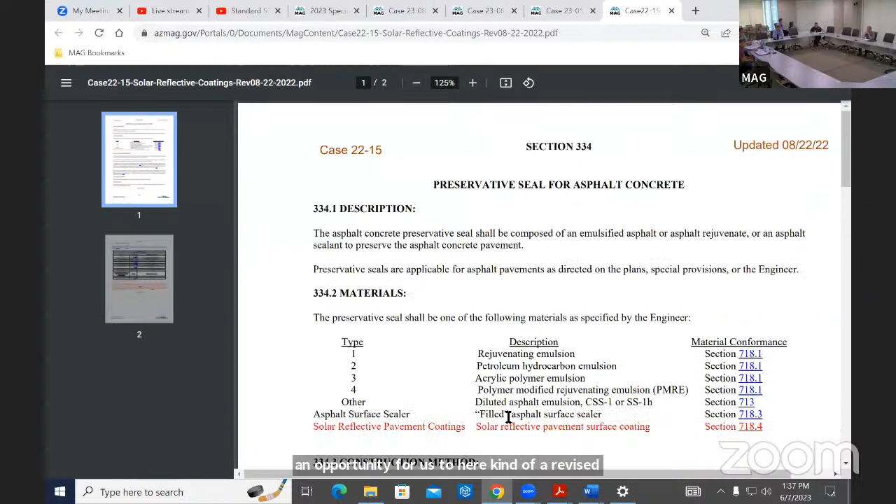And Kelly is the sponsor of this case. Last meeting, we had talked about an opportunity for us to hear a revised presentation. Kelly, if I'm not mistaken, I think in working out the details of that, you were working towards providing that in July. Is that accurate? Yeah, that's correct. My team wasn't able to make it today, so we would like to present in July. Okay, thank you, Kelly. I appreciate that.

This case item here, we do have an opportunity if there's further discussion, if anyone has additional questions or comments, if you want to discuss that at this time, we're welcome to do that. If you prefer to wait until July, until after the presentation, that may be a little bit more effective for us as far as discussing this case. But at this time, is there anyone that would like to discuss or has any questions on this case?

Okay, hearing none, we'll go ahead and move on to our next agenda item. And thank you, Kelly, for working with your staff to prepare that information. I know there's a lot of interest and people are looking forward to that.

So agenda item number 5, case 23-01, our miscellaneous corrections. This was recently updated, so we'll just go back through what these miscellaneous corrections are.

Item A is section 401.5, change Arizona Highway Department to Arizona Department of Transportation. Item B is section 102.10, delete 'or by telegram' from this section. Item C, remove reference to manhole steps in section 605.4, 610.8, and table 771-1. Item D is to correct a spelling error on detail 552 for bituminous. And item E is to replace section 107.4, archaeological reports title with reporting archaeological discoveries.

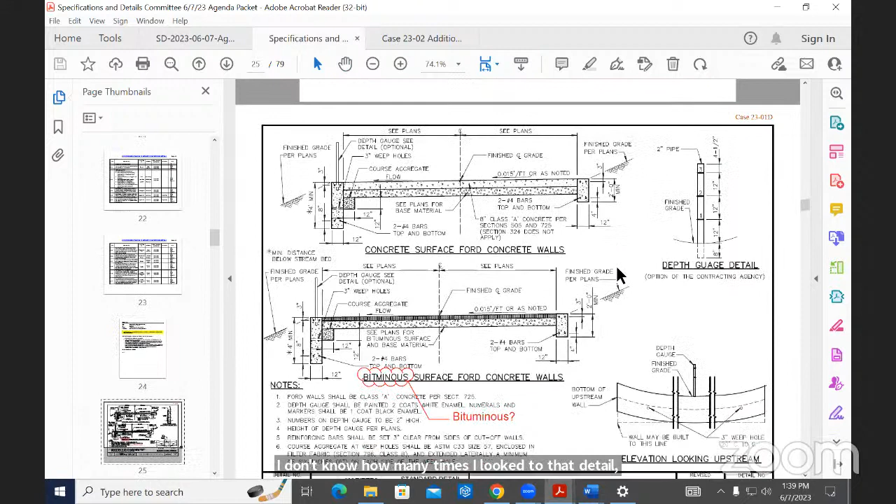And the second one, I know Sarah's on the line, she can probably add a little more to it, but the existing title kind of lends itself to believe that there's a report, but when you actually read the subsection, there's really no reference to a report that is there or a report that's going to be created. And so it was felt that 'reporting archaeological discoveries' was a more appropriate title. So I guess if anybody has any questions, we are open to suggestions.

So I don't know that I have a specific question about the proposed correction here, but Sarah, maybe you're the best prepared to answer it. But what does the section generally state is required?

The purpose of that particular spec is to set forth, explain the process for reporting a discovery during construction. So it's who to call, who to contact, and under the laws, the state laws that we have to follow.

So is it more of a notification then? Yes. Okay, I can see why archaeological reports is misleading for sure.

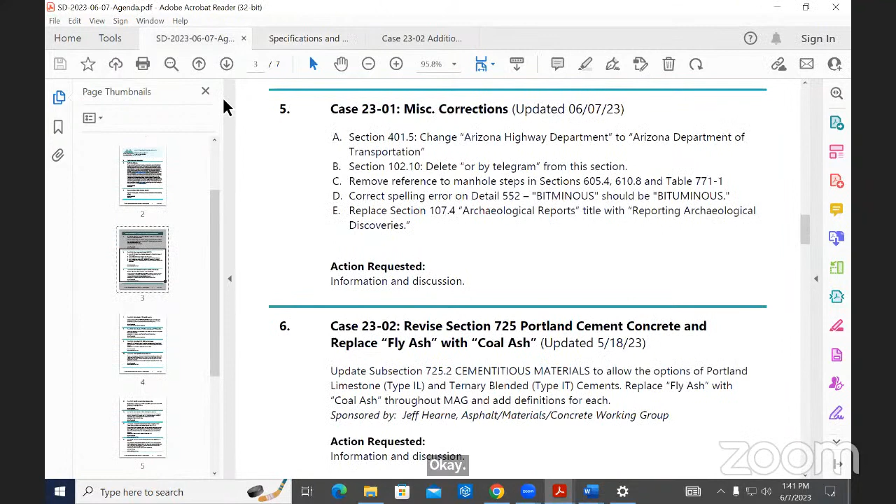Are there any questions or discussion on this agenda item? Is this miscellaneous correction everyone's okay with the wording as shown? Okay. Does anything else need to change in this section? As a title? No, just the title. Okay, that's good.

Okay, then it sounds like I should ask if everyone's supportive of the correction then. If there's no comments, I'm assuming everyone's supportive of it. Okay, we'll have that be part of our miscellaneous corrections case as we move forward through the year then. And certainly if anyone in future meetings has additional comments or discussion items on it, we can come back to it at the next meeting.

Moving on to agenda item number 6, case 23-02, revise section 725 Portland cement concrete and replace fly ash with coal ash. This is something we had briefly talked about in the last meeting, the second part of this, and the case has been updated with a number of changes to reflect that coal ash language. Jeff, you want to go ahead and walk us through the changes for this case?

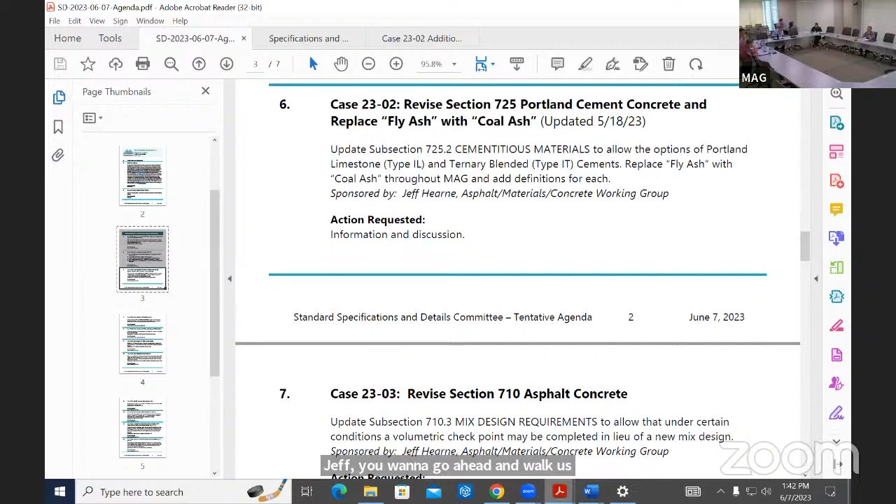Thank you, Mr. Chairman. Looking at the information provided in your packet, specifically the revision of section 725 dated 5/18/23, which would have been after our last working group meeting, we had discussed changing the word fly in fly ash to coal ash. And if you will note, that's been done in this revision.

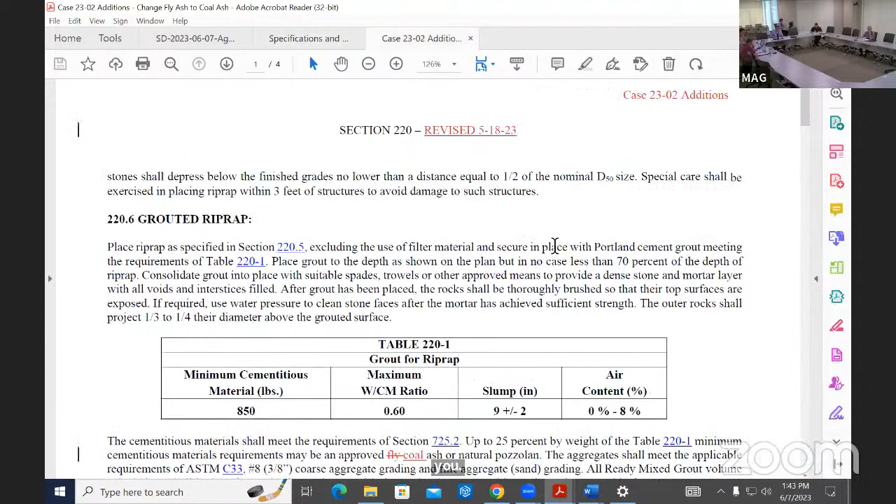I will point them out specifically to you. If you go to the new table 725-2, under item number B, it reads type 1P Portland cement blended or interground with coal ash now instead of fly ash or natural pozzolan. You'll notice right below that, item X, the targeted percentage of coal ash or natural pozzolan is changed there too.

Continuing on the notes, note C under type 1T, coal ash is changed there. Next line, PX, where P stands for coal ash, is changed there.

Moving down then to 725.2.1 under supplementary cementitious materials, we made a couple of clarification changes there, changing the word fly to coal and adding in parentheses such as fly ash or bottom ash so that people will continue to understand what those products are.

And then added another parentheses after natural pozzolan, again as a point of clarification, raw or calcined, because that's what -- well, we probably should have done that a long time ago, but that's the title of ASTM C618, how they're talked about in that particular specification.

That is the specification that's used for the approval of those products.

We also had discussion in our last meeting about potentially providing definitions for a couple of these items in section 101.2 under definitions and terms. That was also included in your packet, a couple of definitions, one definition for coal ash, one definition for fly ash, so that we could further explain what those materials are.

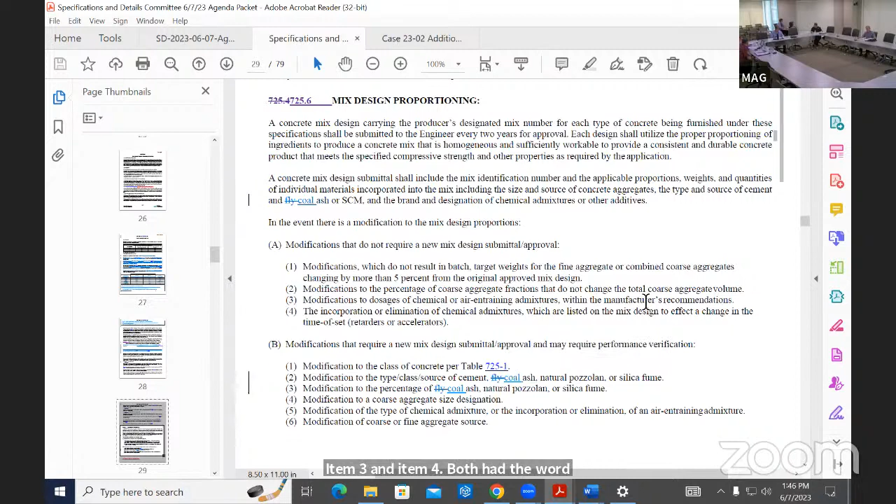Those would have been the changes that I would have proposed to make after our last revision that was dated 5/3. After doing a word search then in the rest of the document to see where fly ash is mentioned potentially in other specifications, there are several other sections where it's mentioned.

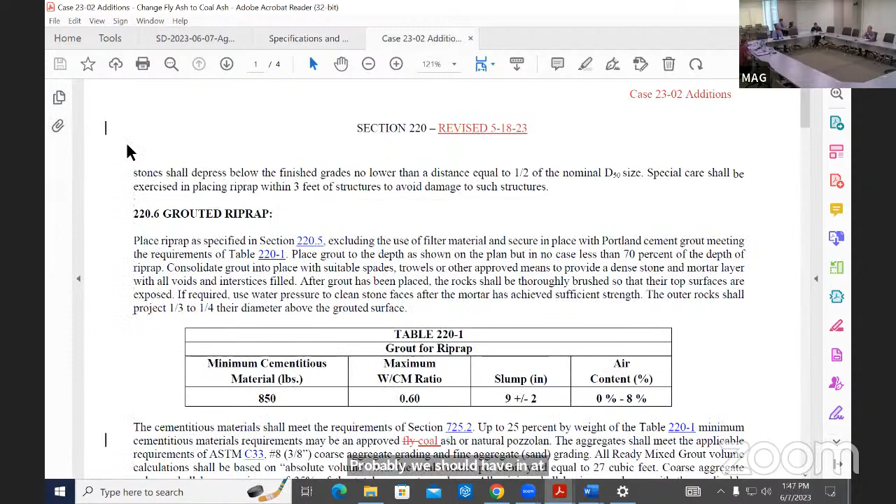Probably we should have at one point in time just referred those back to 725, but we didn't. Particularly in section 220, you look under table 220-1, second line, you have must be an approved fly ash or natural pozzolan. We would change the word fly to coal there.

In section 714 and 715 under mineral fillers, 714.2.1, 715.2.1, again, same scenario. Limestone dust or coal ash conforming to the requirements of AASHTO M242. And then on the CLSM standard 728, again, note 1 under table 728.1, the material is called out there too, the addition of coal ash or natural pozzolan in excess of the required Portland cement content may be used.

Actually, I'm surprised it was only those locations and it wasn't in more locations.

So Gordon and I had some conversation back and forth on how we should potentially do this, since the original case was about cement, adding cement, some new blended cement designations in there. And this really isn't that. But while we have 725 open, we should make those changes that have been done in ASTM.

We talked about maybe making this a new case for the change of this word through these various standards. We couldn't actually agree, so we just presented it to the committee this way as part of the existing case. But if we chose to, I could see that we could potentially make this a different case if we thought we wanted to do that and let them run through simultaneously.

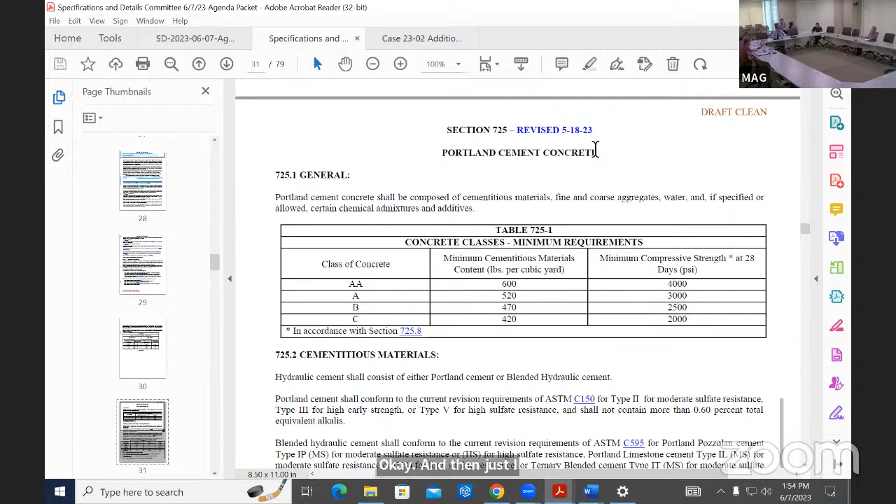Okay, and then just, I think last month we had talked about modifying that table, table 725-2. Isn't that a latest revision from last month, or am I just a month behind now in my mind? No, that's the latest revision from last month. I didn't make any additional revisions to that table since our last meeting.

I don't believe... okay, good. No, I shouldn't say that. Other than the notes where we changed the word fly to coal, the body of the table has not been changed.

Okay, I was just remembering that we had two different tables or something. We talked about combining into one, which is what I'm seeing. But I might be thinking back to comments from two months ago. You're a month behind, Mr. Chairman. Thank you very much. But it's good, I acknowledge that.

That's common. Well, it's been a little confusing for me too, going from working group meetings to this group and trying to keep track of it. So you're forgiven. Thank you.

Okay, are there any questions or comments on this case, or what will be a new case with the coal ash, fly ash change?

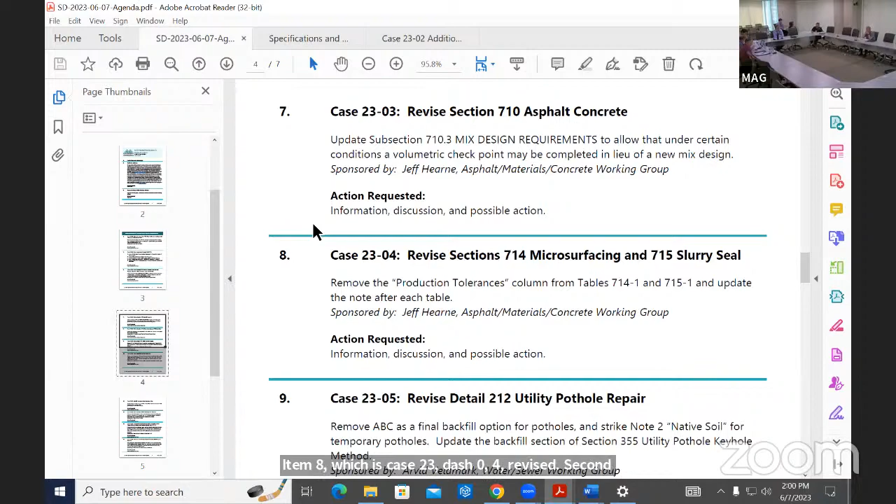We'll go ahead and move to agenda item 8, which is case 23-04, revised section 714 microsurfacing and 715 slurry seal. Similarly, this one is open for discussion and possible action. In the past meetings, we haven't had too many comments or much discussion on it recently.

Jeff, is this also out? You want to turn the time over to Alex to give us a brief overview of this case before we do the vote? Thank you, Mr. Chairman. I would. Alex? Appreciate it. Thank you both.

So this case here came about. We have had some challenges with this specific arrangement. This was something that came to be, I believe it was in 2019 that was added. We had conversation with the group, the pavement preservation group that added it. They thought it was well intentioned. However, it's caused issues being that these are non-blended materials.

Once targets are established, we found that multiple samples can be taken from the same stockpile material and used for a mix design, creating multiple targets that then in production, even though the same stockpile was used and may be compliant, you cannot produce for multiple contractors or projects simultaneously without potentially having failures. We did some investigation with the parties involved, and we have not seen any failures attributed to it. Everybody seems very comfortable with moving forward with the general design band as the allowable range for production.

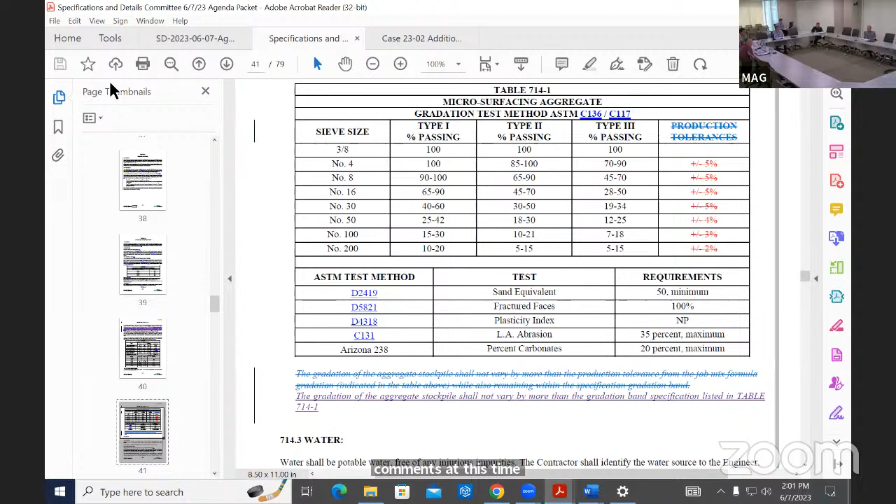Chairman, I'll motion for approval. Okay, we have a motion for approval. Is there a second? Glendale will second this one as well. Thank you. We'll go ahead and do a roll call vote.

Case 2304. Avondale, yes. Buckeye, okay, yes. Chandler, yes. El Mirage, yes. Gilbert, yes. Glendale, yes. Goodyear.

Goodyear, are you still there? Maricopa County, yes. Mesa, yes. Peoria, yes. Phoenix, yes. Scottsdale, yes. Surprise, yes. Going back to Goodyear. Still no answer. So that's 12 yes, 3 not present or voting.

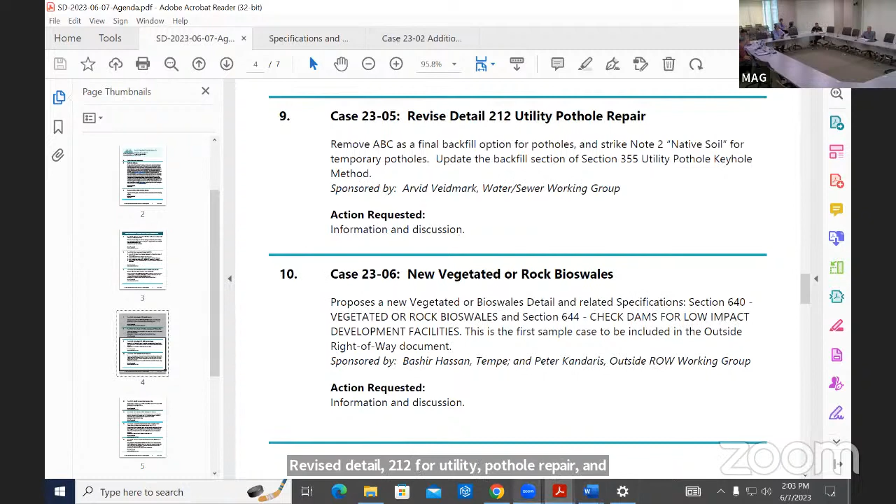Case 23-05, revised detail 212 for utility pothole repair. This case is sponsored by Arvid. If you would go ahead and take us through any updates or discussion on this.

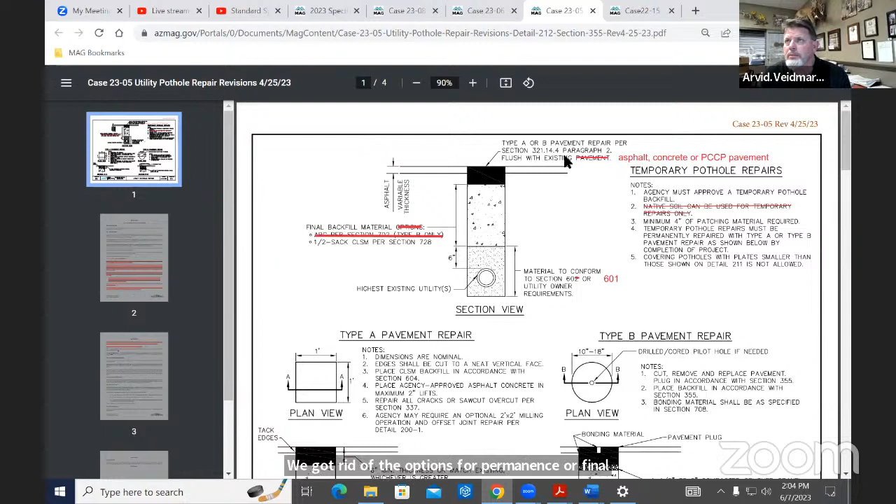Thank you, Mr. Chairman. The latest is on the screen there. There were no additional comments or questions this last month since the last meeting. Just to recap, we had a change to the detail in front of you—you can see where we had an error, we changed it to 601. We got rid of the options for permanent or final backfill, which would be the half-sack slurry, and left it that the agency must approve any temporary backfill if temporary is requested. And then down below, on 355, we went ahead and cleaned up the language in the actual spec to match the detail.

Okay, thank you, Arvid. Are there any questions, comments?

Okay, I would propose then, if there's no further discussion on this—I think we've had a lot of good discussion in past meetings—that we bring this to a vote for our next meeting. Any concerns with that? Okay, hearing none. Gordon, if we can have that on our agenda for possible action for next month. Yes, sir. Thank you.

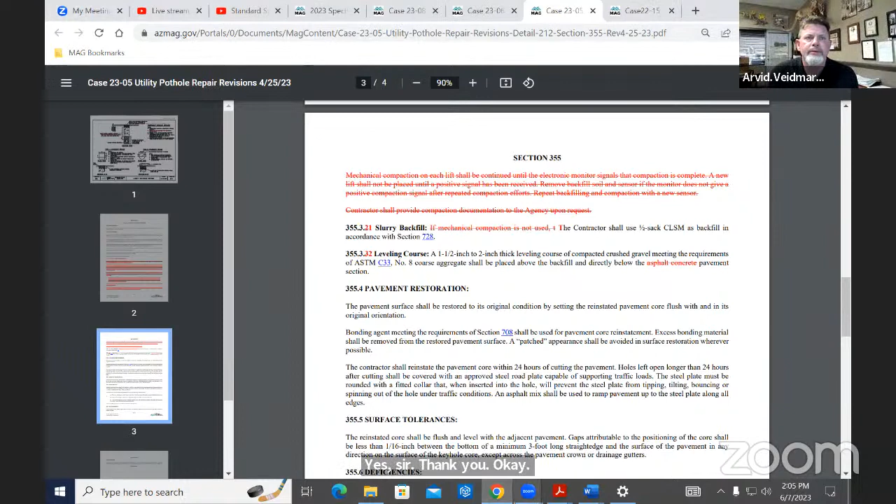My pleasure. Moving on to agenda item 10, case 23-06, new vegetated or rock bioswales.

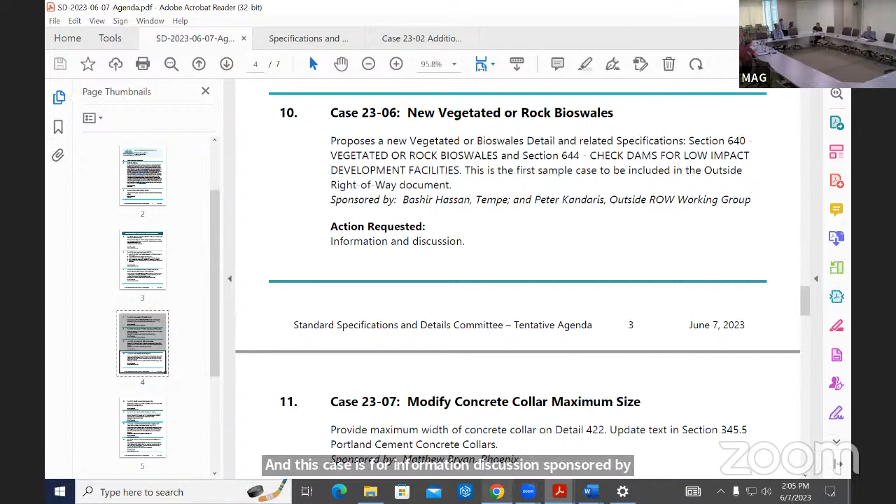This case is for information discussion, sponsored by Bashir and Peter. I don't think Bashir was here today. Peter, are you online and able to discuss this item for us? I don't think Peter is online either.

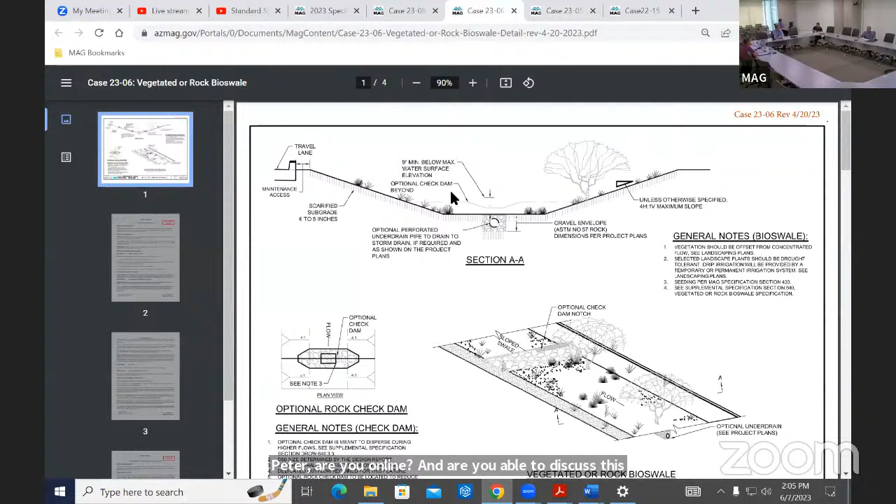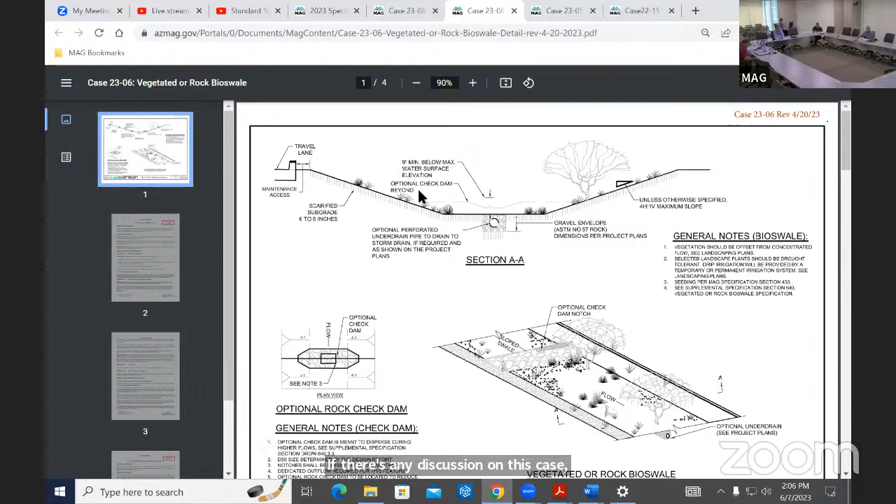Okay, well, this is one of our details that we had discussed, and I think is one of our likely candidates for the out-of-right-of-way document when we are at that point. If there's any discussion on this case, or if anyone has comments they want to bring up, and as a committee we can discuss at this time, we're welcome to do that. Any questions or comments, discussion items?

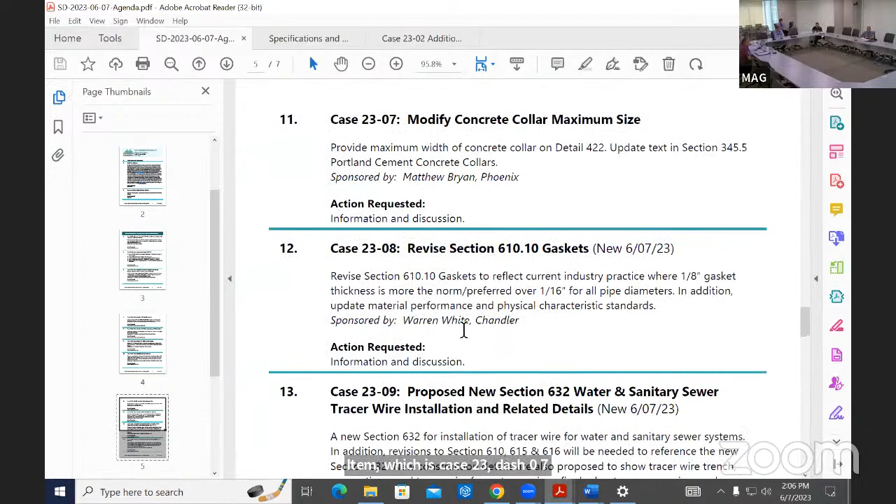Okay, then we'll go ahead and move on to our next agenda item, which is case 23-07, modify concrete collar maximum size. This one is sponsored by Matthew Bryan.

I think we had some discussion on the size of the collar and the necessity of that in one of our previous meetings. Matthew, have there been any changes to this case, or is there anything you want to bring to our attention, or just walk us back through what the concerns have been that are trying to be addressed through this case?

Good afternoon, Mr. Chairman. No, I don't have any changes to this as of now. I think in the water sewer working group, we were going to kind of let this one go. I don't know if we really have a case against it at this time.

Yeah, that's what I thought, Mr. Chairman. I think we're going to cancel this—I don't know what you call it, retract it.

Okay, that's fine. So as the case sponsors are suggesting we withdraw the case for consideration, is there anyone on the committee that would like to see the case go forward? Either we can have that discussion now, or it could be sponsored by others.

Okay, I'm not sure I've seen the withdrawal process on a case, but Gordon, do we need to leave it on, or do we just remove it from our agenda moving forward? Yes, if the sponsor wants to withdraw a case, then it'll just be noted as withdrawn on the case list, and then we won't hear anything more from it. It could be reintroduced at the beginning of next year, but not until then if it is withdrawn.

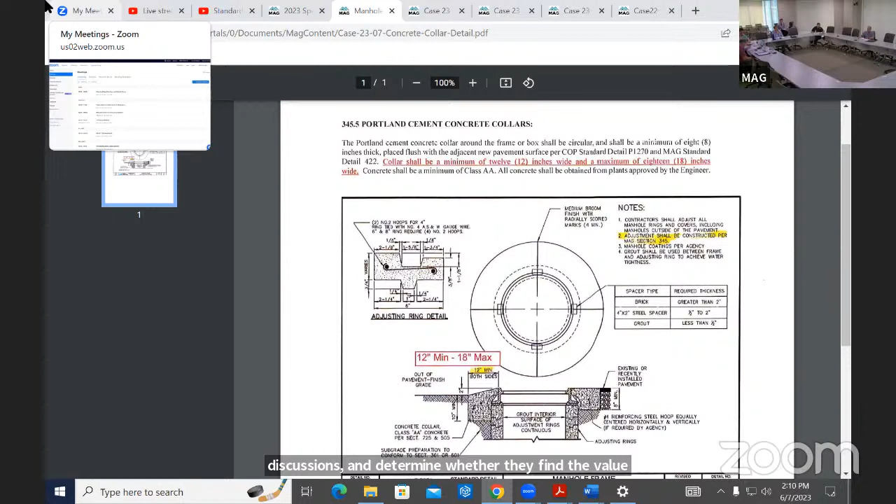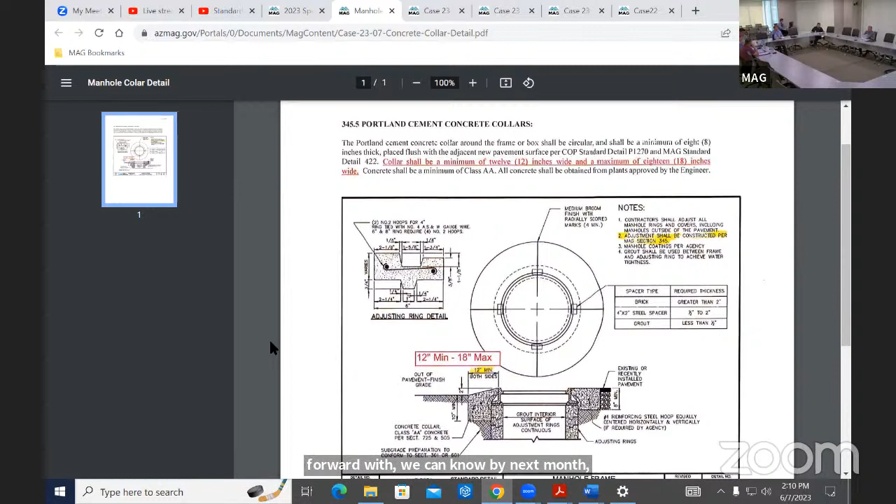Matthew, the request is to continue this case forward another month, and let municipalities have discussions and determine whether they find the value in this case as proposed, or a version of that. Are you willing to continue moving forward with it for another month? Yes, Mr. Chairman. Okay, so we'll go ahead and leave this on, understanding the thought process right now is that this may be withdrawn in the future. I'd highly encourage our committee members to go back within the next few weeks and have those discussions necessary, so that if it is a case the committee wants to move forward with, we can know by next month. Otherwise, we'll likely have this as a withdrawn case. So thank you, Matthew, for your efforts so far, and we'll go ahead and continue moving forward with it.

Mr. Chairman, can I interject a comment real quick on this particular matter? Yeah. When everybody takes this back for discussion, just keep in mind that we're dealing with finite resources here, and if we're gonna put a standard in place for strictly aesthetic reasons, let's consider the finite resource portion of that. That's all I wanted to mention.

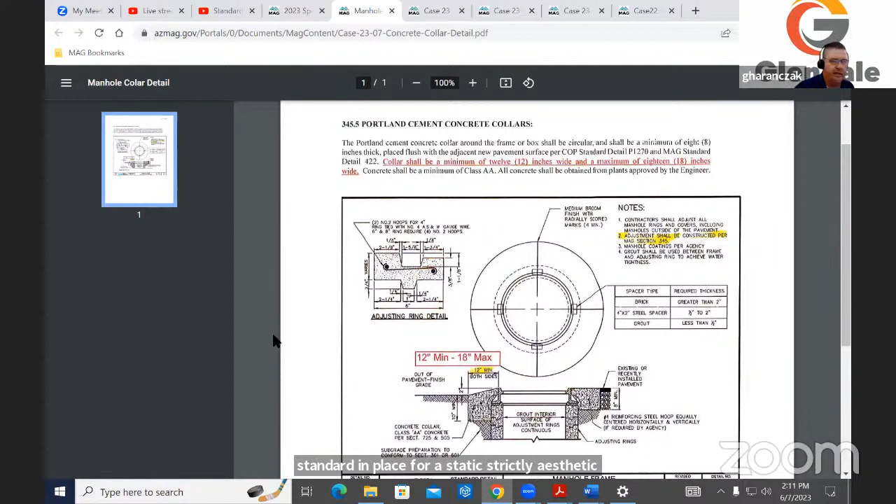Okay, we'll go ahead and move to agenda item number 12, case 23-08, revised section 610.10 on gaskets. This is a new case for this month, and so this is for information discussion. And we have Warren here. Warren, you want to introduce the case? Thank you, Mr. Chair. Good afternoon, everyone.

Yes, this is a new case. It was originally presented as just an update to the gasket thickness. It has been expanded a bit to also update some outdated performance and physical characteristic standards that are noted there. This is pertaining to section 610.10 in paragraph D. You can see in the case packet, it includes the strikeout and the recommended language there.

What I've changed is basically adding that the gasket material shall meet ANSI C111 and AWWA A21.11. If you research that, they kind of go hand in hand, and those are related to more or less the rubber gasket joints for DIP pressure pipe, so it's more of a pressure rating designation. That's one replacement, kind of bringing this up to what I see on material submittals and things like that.

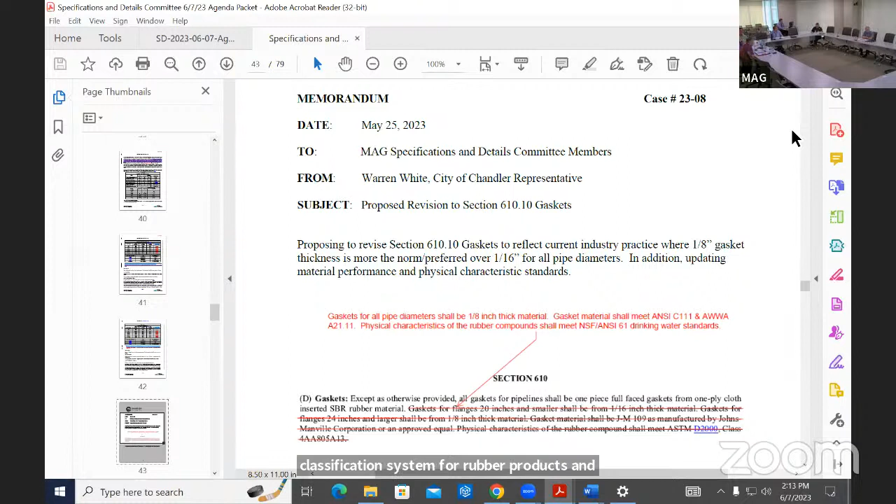Also, replacing the manufacturer listing, we have, as we've been trying to do in MAG, replacing the JM 109 or approved equal type of statement. And moving on from that to replace that ASTM D2000, which if you look at that, is a standard classification system for rubber products in automotive applications. I think that's maybe what was available at the time. Similar to material specs, I think putting the fact that it shall meet the NSF ANSI 61 drinking water standards would probably be more appropriate. I'm open to suggestions, but those are the two revisions.

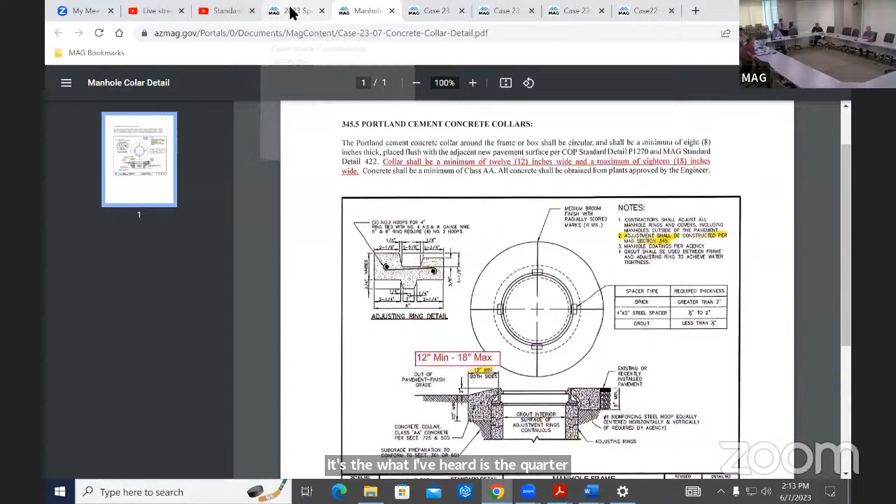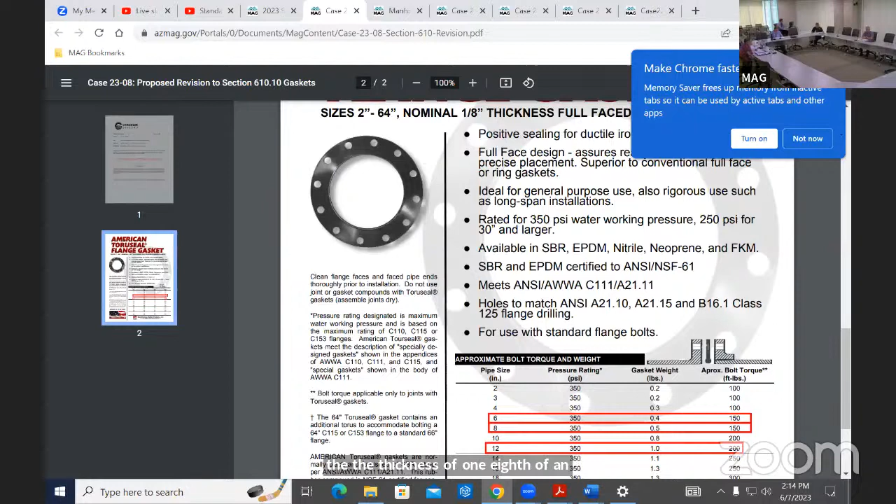And again, on the material thickness itself, what I've heard is the 1/4 inch, or excuse me, the 1/16 inch, was too thin, and most vendors have moved on to a thickness of 1/8 of an inch, which is more durable. So that's the case. Thank you, Warren.

So I'm not as familiar here, but with NSF or ANSI 61 drinking water standards, is there a section that specifically talks about the physical characteristics of rubber compounds? Basically it outlines the fact that anything in the public water system must meet the drinking water standards, including rubber, anything we put into that system. So it's more of a general standard. It doesn't go into specific properties of rubber, like for rubber gaskets necessarily. Correct. Okay. Yeah. Okay.

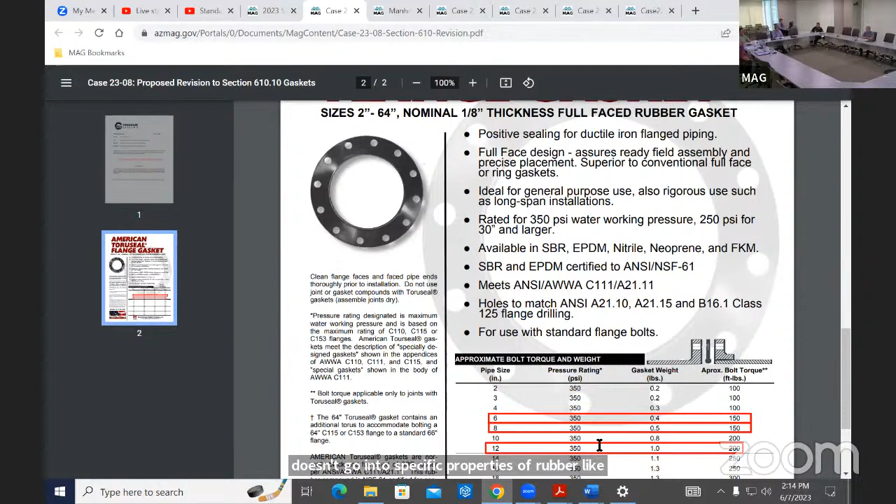And I'm assuming there's been discussion of this in the water sewer working group. What can you give me, what's the feedback been, or what's the discussion kind of been on that? Basically, limited discussion at this time at the water and sewer. We've just touched on the thickness. And then what was brought up at the last meeting, that we should probably look at the other performance and characteristic standards. So this is just basically kicking it off, open to suggestions or comments. Okay, let's open it up to the committee for any questions, comments, or discussion.

Mr. Chairman, I just wanted you to know that I wanted to take this to our Water Services Department and get their input before we make any final comments. Yeah, great, thank you, Dan. I appreciate that, and I'll be doing the same with City of Mesa. I'll be working with our water resources staff to review, and hopefully I can be prepared with some additional feedback in our upcoming meetings. Anyone else have questions or comments at this time?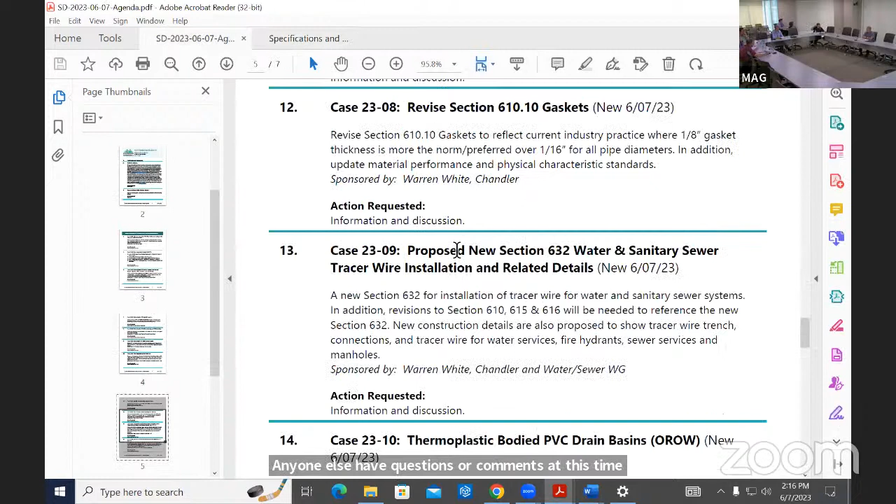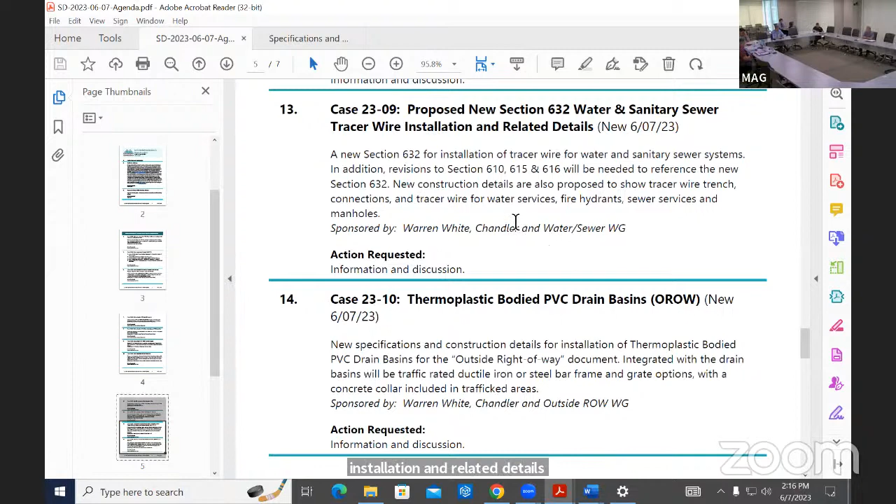Okay, hearing none, thank you very much. Appreciate it, Warren. We'll move on to our next agenda item here, which is case 23-09, proposed new section 632, water and sanitary sewer tracer wire installation and related details. This is also a new case that we'll have presented here today for the first time, also sponsored by Warren, with the support of the Water Sewer Working Group. If you want to take us through that one, Warren?

Thank you again. This has been touched on in the past couple of years. I think Water Sewer is finally pulling things together to submit this case after finding some decent material out there that I've noted at the bottom, that document you can hyperlink to. Currently in the specifications and details, we don't really talk about the locator wire, tracer wire, or the actual tape that goes above the pipe. So this case would introduce those.

And I'm not sure if this is required, if tracer wire is required in all agencies. So there is language, if we introduce this, in the installation specifications, that would be as required by agency. The tracer wire itself is an acceptable method to meet the requirements of ARS 40-360-22, which basically says all underground facilities must be locatable.

So this tracer wire is something, I think, in Chandler, I know we've had details and some trench details that specify its use, but we haven't really had anything that puts that system together, that makes it clear what you're actually installing and terminating. So the package itself is logical, I think, in terms of what I've found after researching. There are definitely some areas that I think need more vetting and discussion. I think we need to work through the working group.

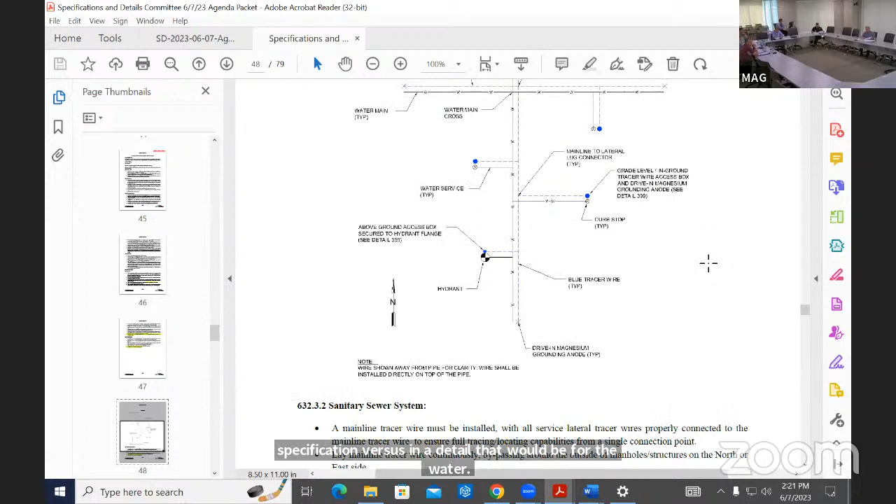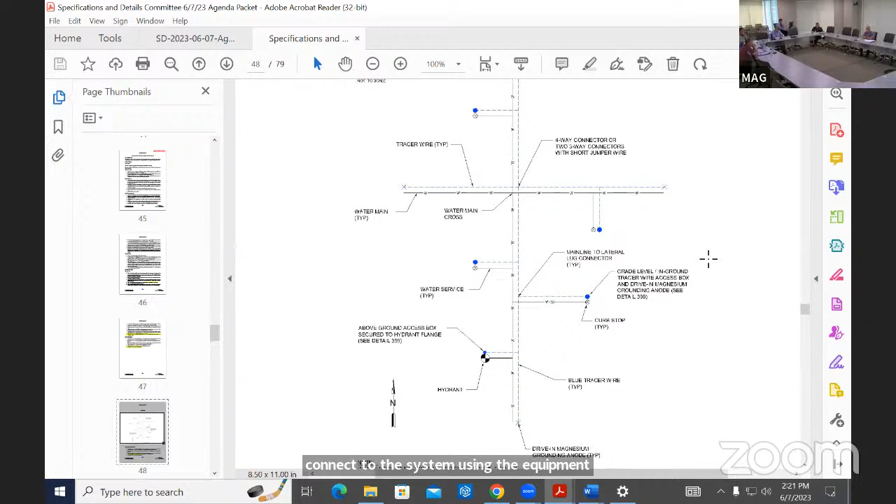You can see it's a continuous network where you have connections at the crosses. Basically, it terminates at the water services, maybe curb stops at the hydrants, so you could actually get out of the right of way and connect to the system using the equipment, and everything's hot, and you can locate your lines that way. Actually doing it at every water service, I've had some thoughts on that. I may be a little overkill, but we'll have to talk about that, something we can discuss.

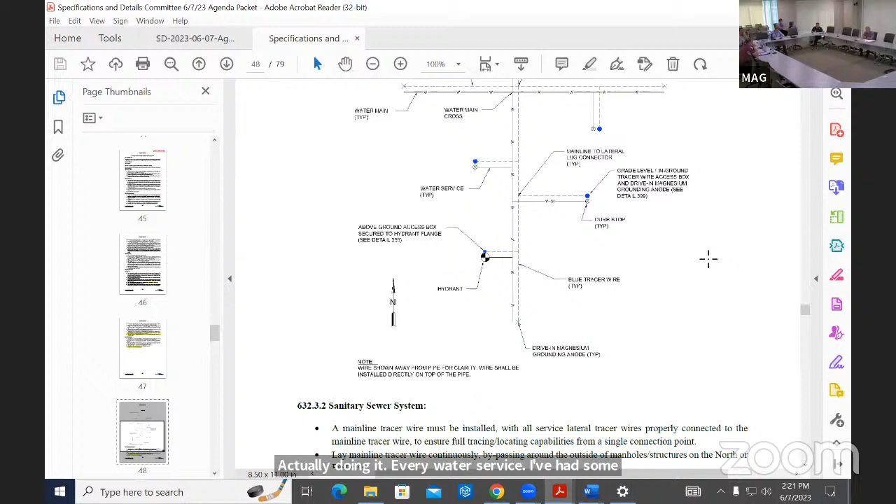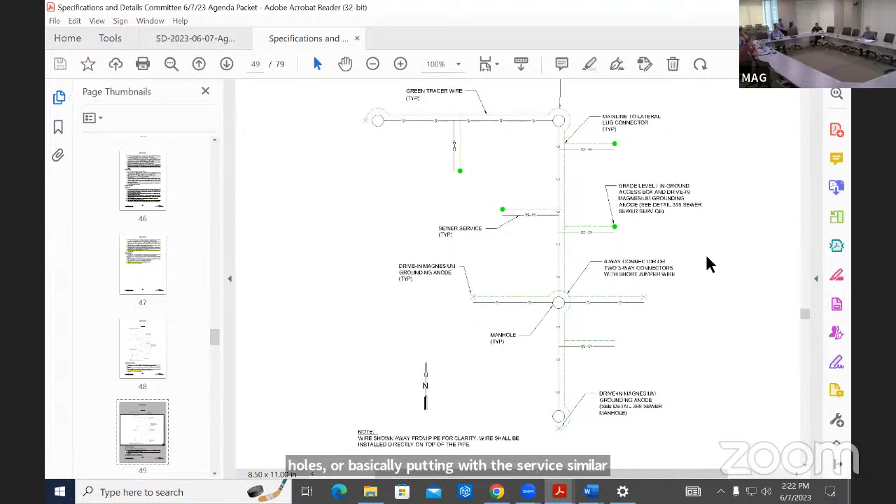And likewise for sanitary, similar thing. I know in Chandler, our current standards have had those locator wires coming up the manholes, which has always been a little unusual in my mind, because every time you do the mill and overlay and adjustment, you have those wires and you're going to pull out the adjustment rings, and the contractor's probably not putting them back in the way they were. So this proposal would not bring them up at the manholes. You're basically putting them at the service, similar to every service. And again, that might be overkill, but we can talk about that. So it's a complete system to be able to locate your underground facilities using the wire. I've heard it's a cheaper method to do things.

Then moving on to the details themselves. This is simply the trench detail showing the identification tape. And again, if you look in our specifications, we don't really have a requirement for that. But I believe most agencies probably have some type of tape above their pipes. So okay, you're excavating, oh yeah, it's a blue tape, I'm about to hit water, or green tape for sewer, or purple. So that kind of thing.

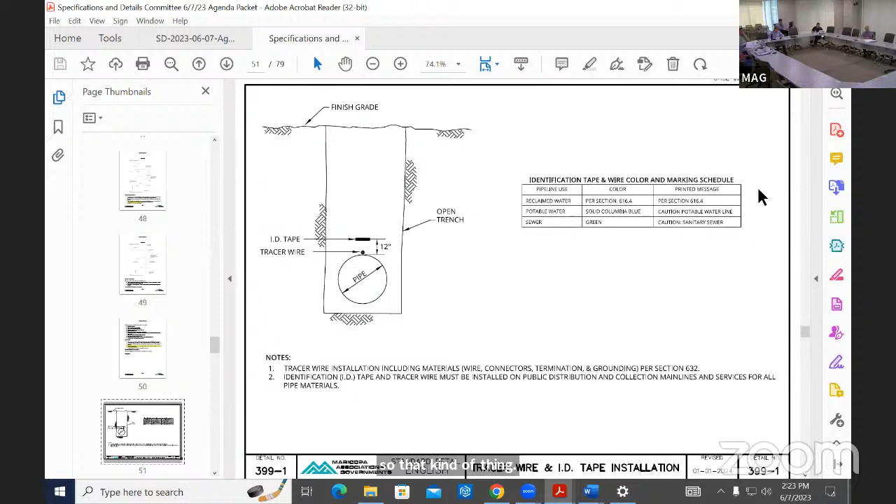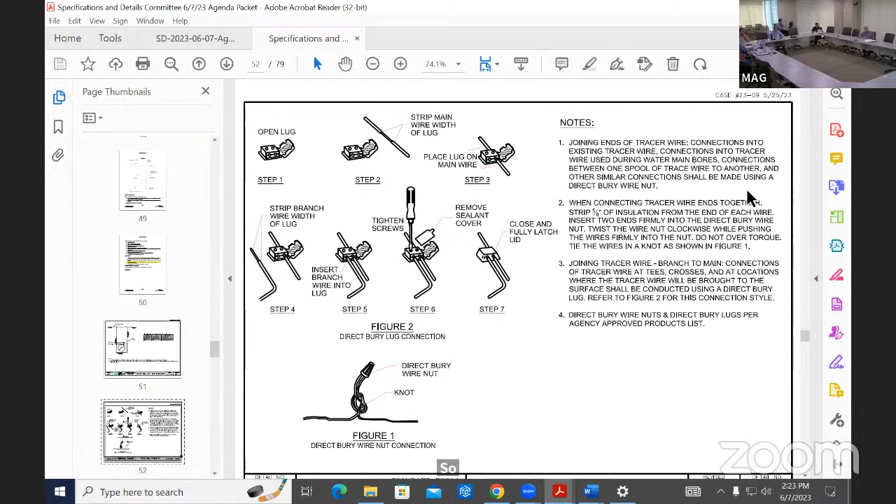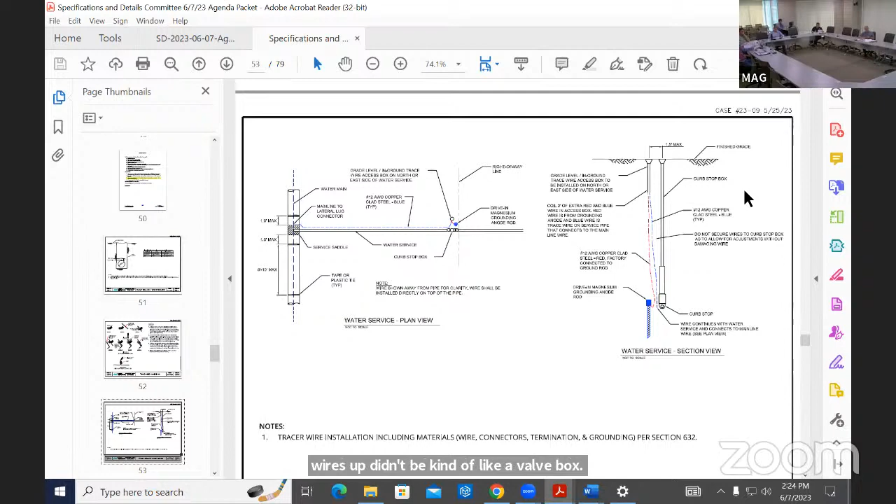Moving on, into the actual details of how you take the wires up the services, how you're doing the grounding, bringing the wires up. It would be kind of like a valve box, I guess, where the wires would pop the lid and connect to the wires that are coming out there.

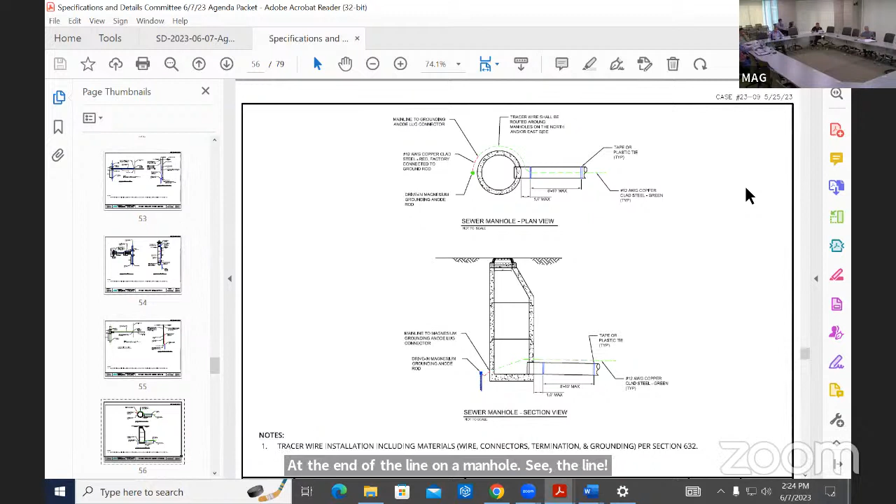So it's all very similar at the hydrants. You're connecting to the hydrant. And then it's sewer services similarly. And then this last one shows how it would be at the end of a line on a manhole. See, the line doesn't come up the manhole. It just terminates there at the base of the manhole.

And then last, these are the installation specs. Again, I've tried to be consistent, putting it in the general, talking about the identification tape shall be installed per detail 399. I believe all agencies require that, but if that's something to discuss, we can. And then the tracer wire itself, for that new section 632 and detail 399, as required by agency. If that's necessary, we can leave that.

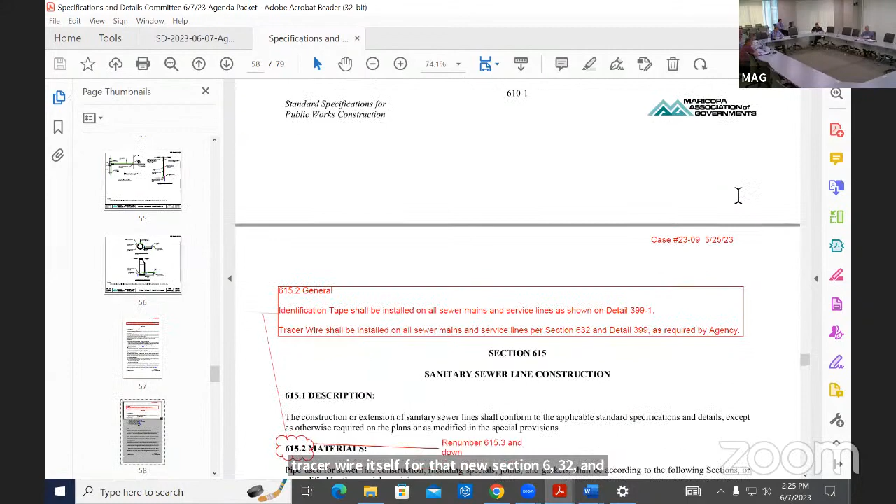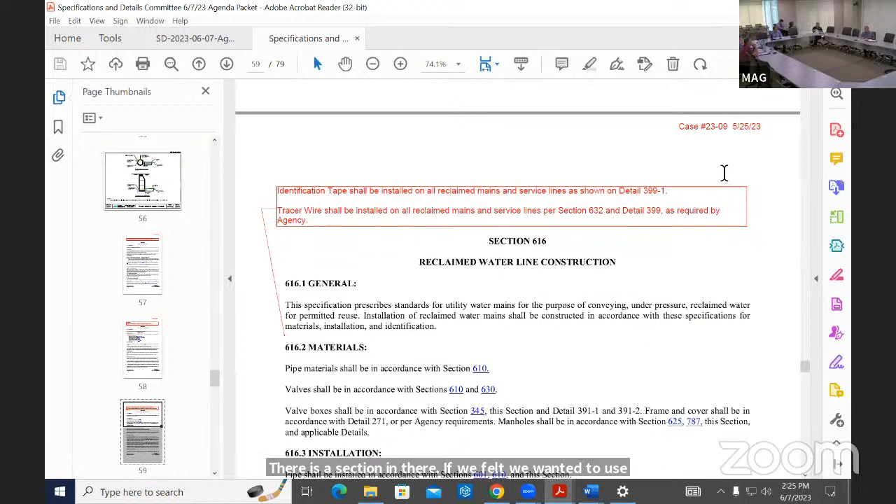So that applies to the water line construction, sewer, and reclaimed water. What I didn't note when we were looking at the specification itself, there is a section in there. If we felt we wanted to use this for locating storm, we could do that as well. Storm would be similar to sanitary sewer. So a little flexibility there.

So that's a lot, I guess, to introduce there, but we can kick it off from there. Yeah, thank you, Warren. That is a lot of information, a lot of work obviously gone into this so far.

I guess my first question is, and maybe I just missed this, but did you talk about how in the MAG specifications already, there's references to tracer wire, but there's no specification on tracer wire? Is that correct? There are a couple references to tracer wire on, I believe, the boring detail, but there's nothing in the actual installation specifications at all, for any of the utility, water, sewer, any of the other utilities. There's in MAG, there's not a specification requiring or indicating tracer wire. Not at this time.

Okay. And is Chandler using that, or municipalities in general, as far as what you know, using tracer wire on all the underground utilities, or just PVC utilities? All water, sewer, reclaimed, ductile iron, PVC, clay pipe, anything? Correct. I've heard that even DI is not locatable underground because of the wrapping and things like that.

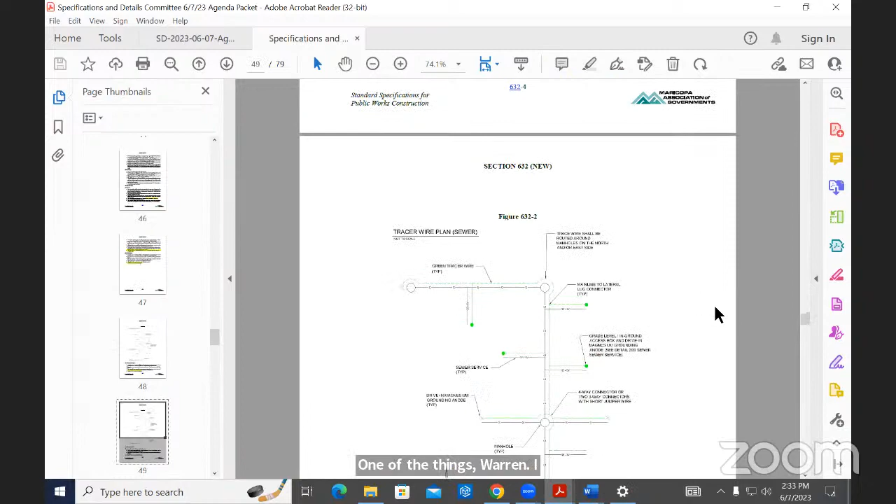Thanks, Jim. Okay, we'll do, and just as an option. I mean, hopefully most agencies can do it themselves, but there are third parties out there that do it. A lot of the companies that do cathodic protection can do it. So that's all I had for now, and we'll do a lot more of it in the working group as well.

But yeah, it's really detailed. So thank you, Warren. No problem.

And lastly, I forgot to mention that last measurement and payment. Instead of this being a new pay item, it would still be considered part of and included in the water line and sewer line construction. So we don't want that as another pay item, would we?

So in the discussion so far, has there been discussion of the potential cost impact, or is this a requirement anyway, so it doesn't really reflect a new cost on a project? That's my understanding, because they're already laying those wires out, the copper, the additional terminations, things like that. Again, I haven't seen and witnessed how it's being done.

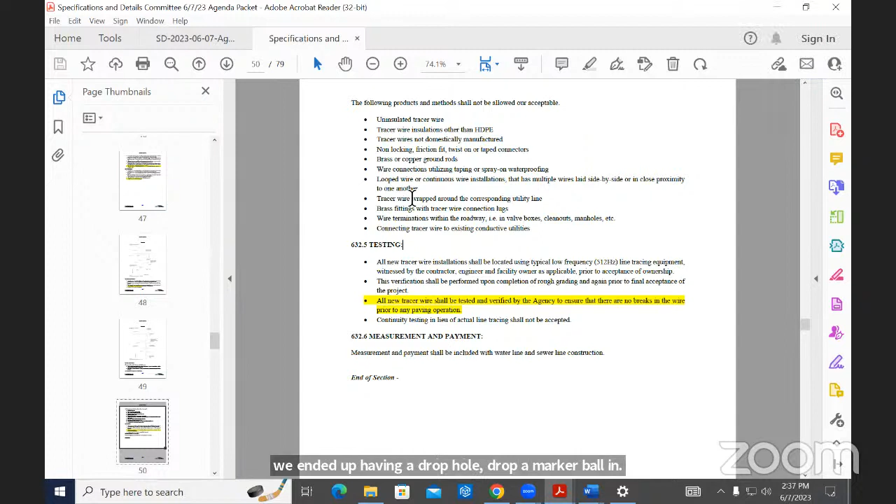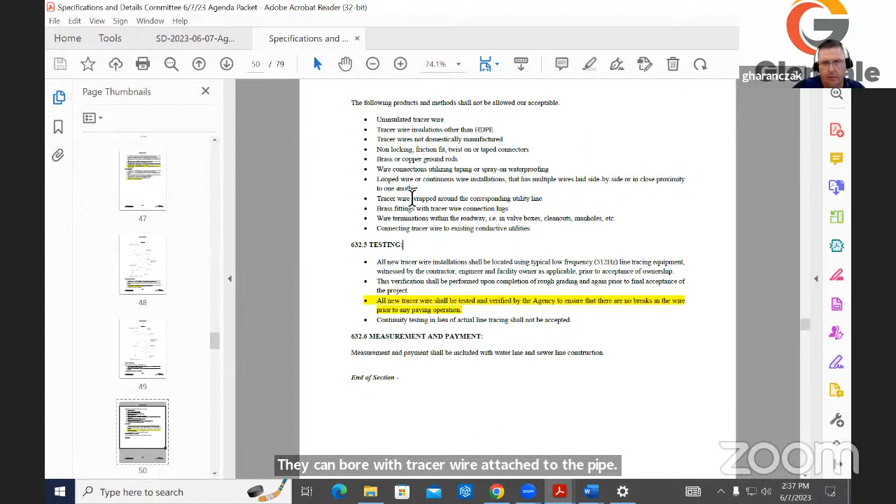Yeah, I don't know, Arvid could comment on that. He does a lot of this, and I asked them, you know, can they bore with tracer wire attached to the pipe? Yeah, we were able to do that, but we did lose it in one spot in particular. We lost about a 400-foot run, maybe a little less than that, of tracer wire where it didn't go through.

And that's the risk you take in HDD, of course, you don't know to what extent. Did they tape it to the product line? Did they tape it every foot, or every 10 feet, or every 5 feet? Ultimately, we ended up just dropping in 3M marker balls, but I didn't know what else to do on that particular application. If they cut the PCCP, I might get an earful.

Oh no, you're right on that regard. So one of the discussions we had in the working group was when it comes to trenchless applications, we have a tendency of using a lot of duct tape to ensure we're doing everything in our ability. We'll tape it every foot on the HDPE or whatever the product is, because you've also got the risk of it getting torn, but you've got the rotation too. Oftentimes the HDPE will rifle as it gets pulled back, and now you're getting that tracer line almost corkscrewing through the ground. That is the risk with testing.

The other thing I've seen agencies do across the country is pull in a PVC conduit that's taped to the product line, and then put the tracer wire down through that. So that's another alternative to hopefully avoid damaging the tracer wire. But there's also the risk that you're going to damage that small PVC pipe. So trenchless opens up its biggest challenges.

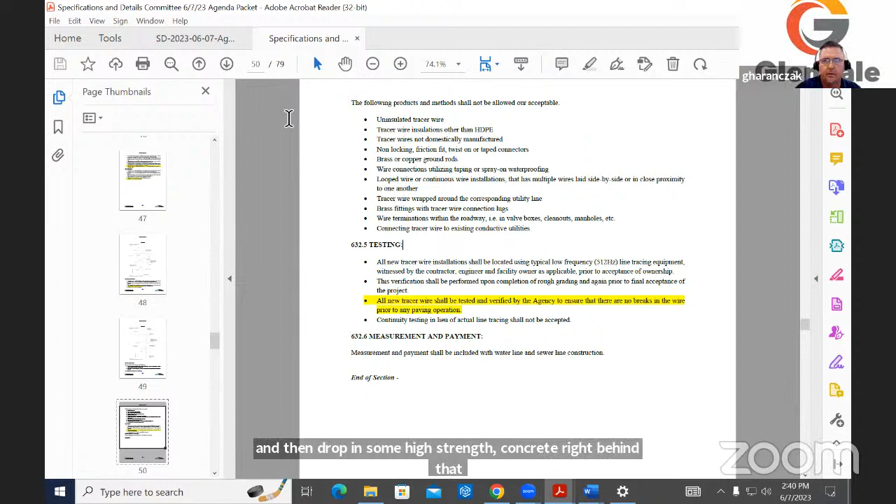To your point, real quick, of what happened in that scenario - we've done it before where you'll go in, core a hole in the concrete, pothole down, find the top of that line, and then, like you said, that's probably what you did - drop in a tracer ball at that location. Yeah, it was either excavate a 12 by 12 panel and deal with the load transfer doweling and all that, or core it. Yep, and then drop in some high strength concrete right behind it. Yeah, that was a good call. That was a good way to still give your ability to find stuff and not do a lot of damage to the existing grade. So we've got options.

Well, thank you for the conversation.

Absolutely. So Arvid, on that note, same thought process - would it be something that may be an idea to double up on a tracer wire when you're doing an HDD? So if you lose one, you've got the other. Is that something that could be a possibility, or if you're going to lose one, are you going to lose both? No, that's a great point.

On larger projects, if you're pulling a non-conductive product through the ground, other than, let's just say, steel, then yeah, you could put 2 or 3 strategically placed on the pipe. Maybe put one at 6 and one at 12, one at 3, one at 9, and tape them. You're going to be taping it up anyway, and wire is cheap, so you might as well put on as much as you feel comfortable with.

And that comes down to the ground conditions, the length of the bore, how big is the overcut, is the driller pumping the mud at the proper viscosity to allow for a slick pull through. If they're doing all those things and everything falls in their favor, odds are those lines will make it. Historically, when we see the tracer wire break on the product pullback is when they get into cobbles, rocks, or gravel, or they're not pumping their mud runny enough - that's the best way to put it - to help a nice slick pull through. If they let that mud bundle up, then all those cuttings start to bundle up, and that's when we see that tracer wire get torn off.

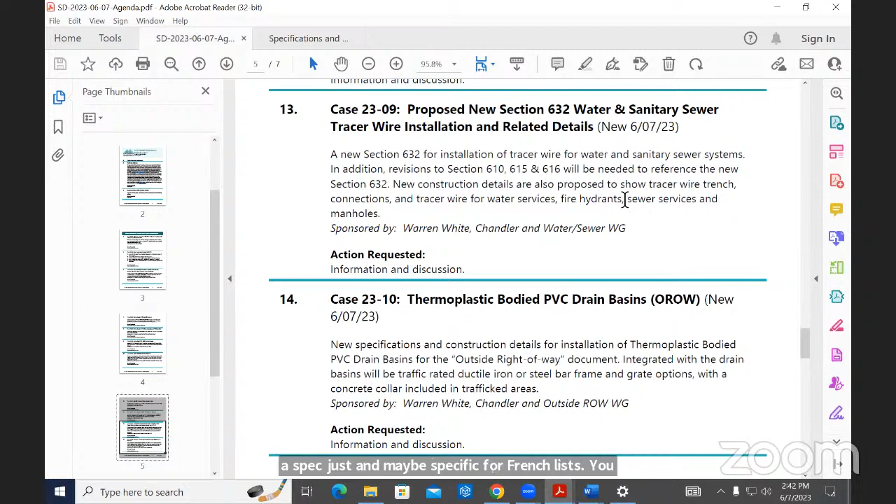Okay, thank you, Warren, for the introduction of this case. There's a lot of information there, obviously. I'm certain municipalities will want to take some time to go back and review that, and I'm sure we'll have many months of good dialogue coming up on this case and all the little aspects of it. So thank you for your time so far, and we look forward to continuing this discussion moving forward.

Mr. Chair, one last question. Did you want to pursue a presentation in this group or the working group, or wait another month? I know we were talking possibly—what's your thought on the presentation? Yeah, I think I'd be okay with the presentation. There's a lot of information here, so I think that would be helpful.

Let's talk about timing afterward. I think it's definitely something I would want to invite some of my city staff to at least watch online, so I think moving that direction would probably be good. Just timing wise, whenever makes sense, I'm not quite sure. I think allowing some time for people to digest what's already here will probably be beneficial, to let them start generating some questions. Okay, makes sense. Thank you.

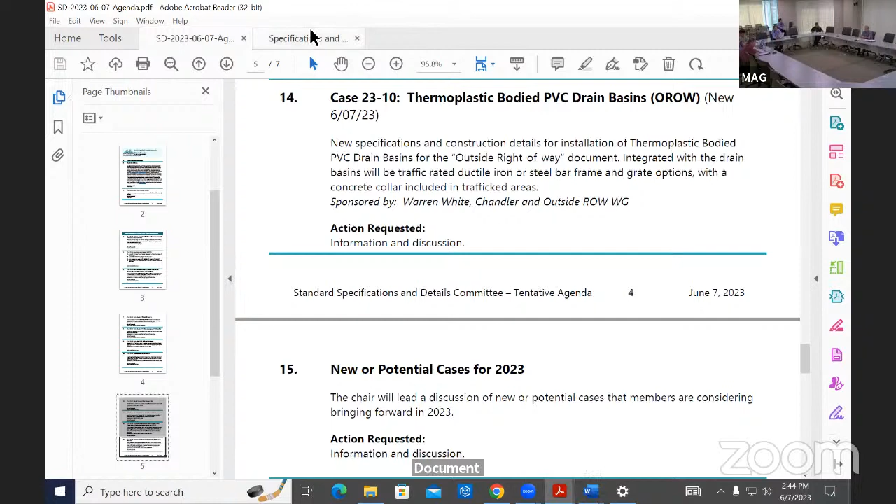Okay, thank you. We'll move on to our next agenda item, case 23-10, thermoplastic bodied PVC drain basins for the outside right-of-way document. Warren, looks like you're the winner again. I will briefly kick this off, and then I'm going to turn this over to Nick. Thank you, Nick. I know this has been discussed in the outside right-of-way working group since I believe last August, and I'm familiar with the product. I think most of us have probably seen this on site in many instances.

These types of structures for storm systems—it's well used in the valley and elsewhere, I know. That's another large case with lots of effort here, but Nick is definitely the one that can give us the update and talk this through.

Thank you, Warren. So we've sat on the outside the right-of-way subcommittee for almost a year now, presenting this case, and this is the first time we've pushed it to the main committee. We've made a little bit of progress from where we first started with this. We understand we are applying for an outside the right-of-way application, and this is our PVC thermoplastic body drain basins. It'll be integrated with a ductile iron or steel bar frame and grate.

In the detail packet I included, there's both of those, with a concrete collar included for trafficked areas or where otherwise deemed necessary. New construction details are also included if you want to scroll down a little bit, Gordon, as well as the spec.

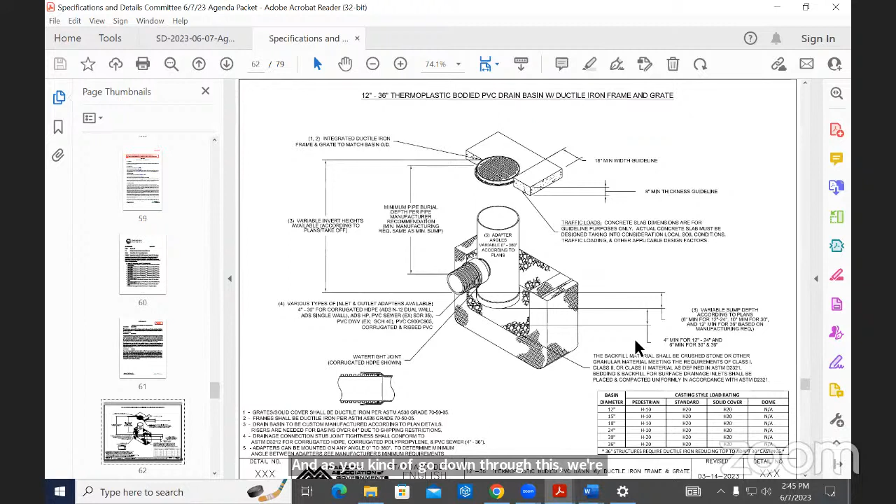As you go down through this, we're applying for 12-inch through 36-inch thermoplastic bodied PVC drain basins. This right here would be with our ductile iron frame and grate option. If you keep scrolling through this detail packet, there's individual details for what these castings look like from 12 inches to 30 inches.

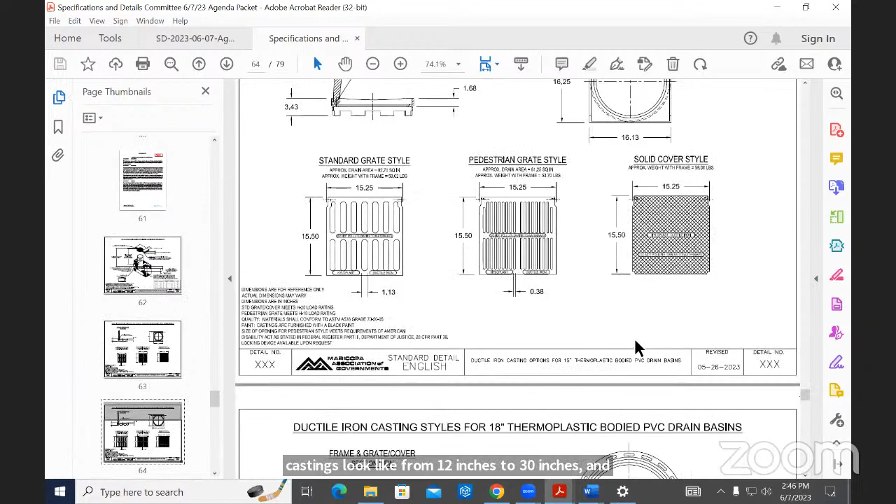And then if you want to scroll down to where the steel bar is, what we call our mag style frame and grates—model mag 535 for a 2x3 steel bar grate, and a mag 537 for a 2x2 steel bar grate. So right here is the 2x2 steel bar frame and grate, same sort of thing.

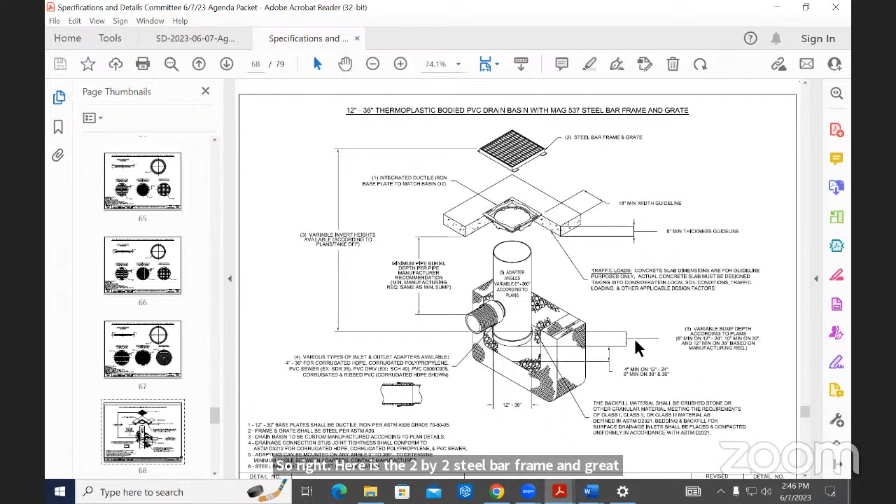There's a ductile iron base plate that adapts to make the square to circular connection. Same sort of idea here for the mag 535 style grate—steel bar has a base plate that adapts to connect the circular basin PVC part to the rectangular 2x3 steel bar frame and grate.

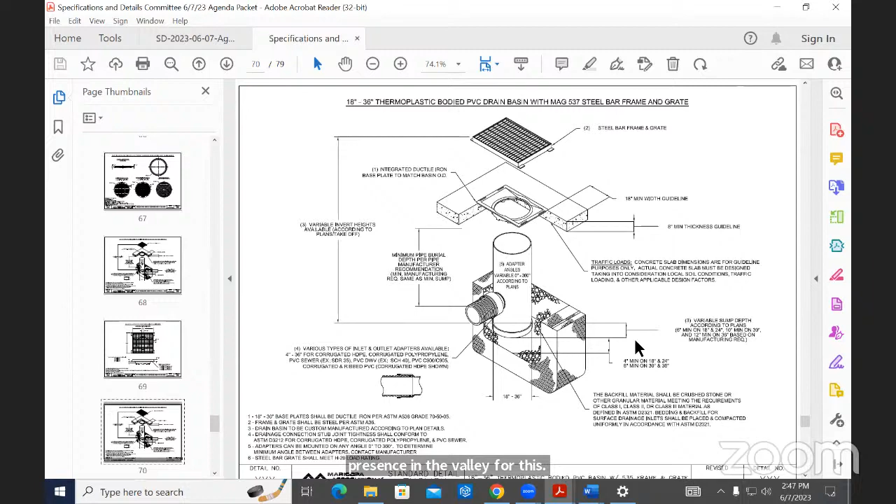As Warren mentioned, we have a very large presence in the valley for this. It's being used on off-sites, or on sites all the time, so outside the right of way currently. That's why we are pursuing this spec for everybody else.

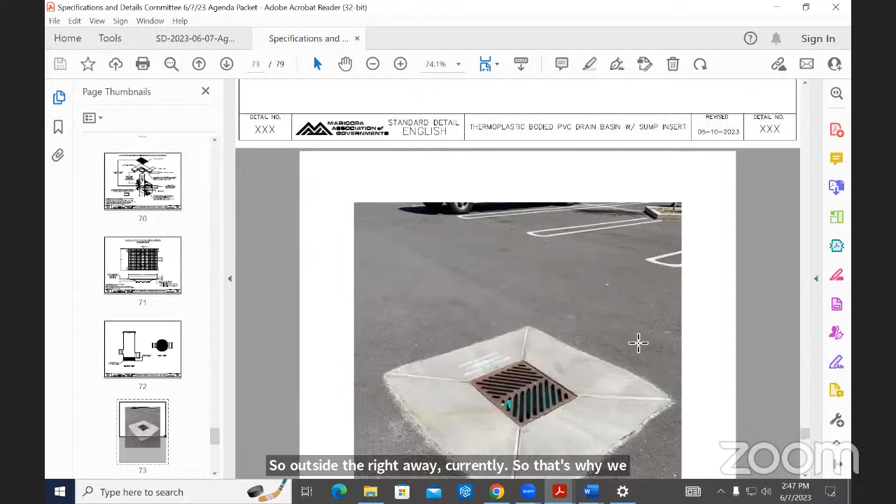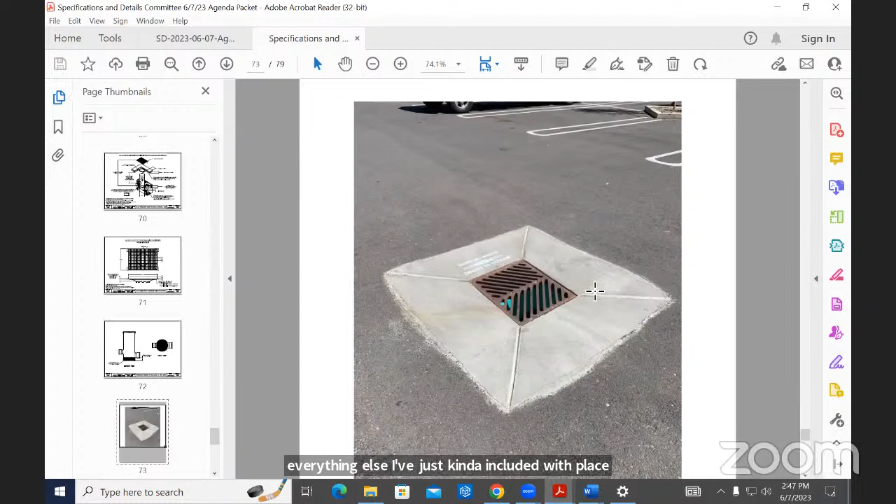And Nick, it sounds like you're still working through the outside right of way group on the numbering and things like that, right? Yes, so Gordon has given us the case number for this, but yeah, everything else I've just included with placeholders for now. I think that will come to light more as that subcommittee document progresses.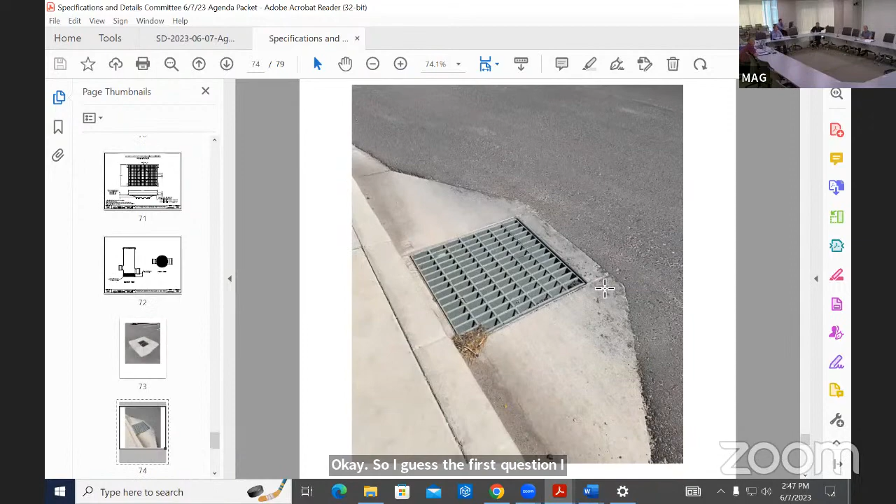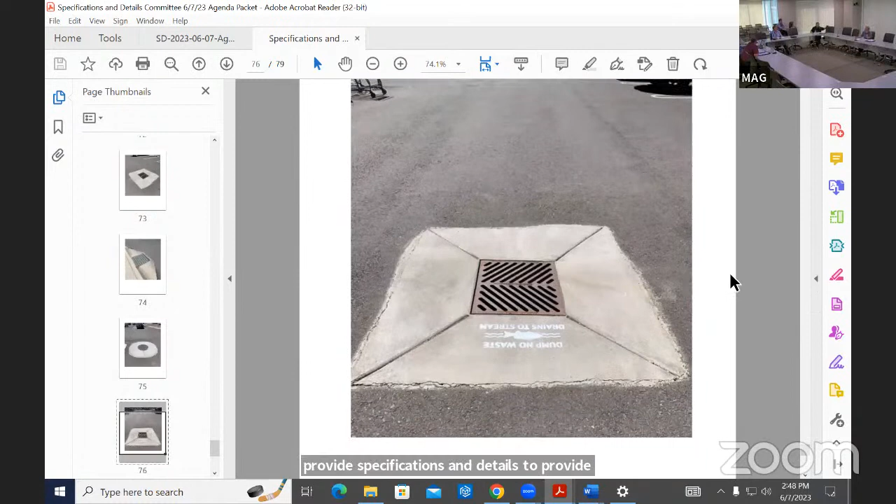Okay, so the first question I have is on this case. Typically what we're looking to do as a committee is provide specifications and details to provide consistency throughout the municipalities for details or specifications that are commonly used. So I think the commonality aspect of this, or the frequency of use, is something that makes sense that we could introduce a detail. The second aspect is we're typically looking to provide details that are universal and provide for multiple manufacturers or suppliers to be able to meet the detail. So my first question is, are these details specific to a particular manufacturer and product, or are they generic in nature? And if so, how many different manufacturers can meet the detail and specification?

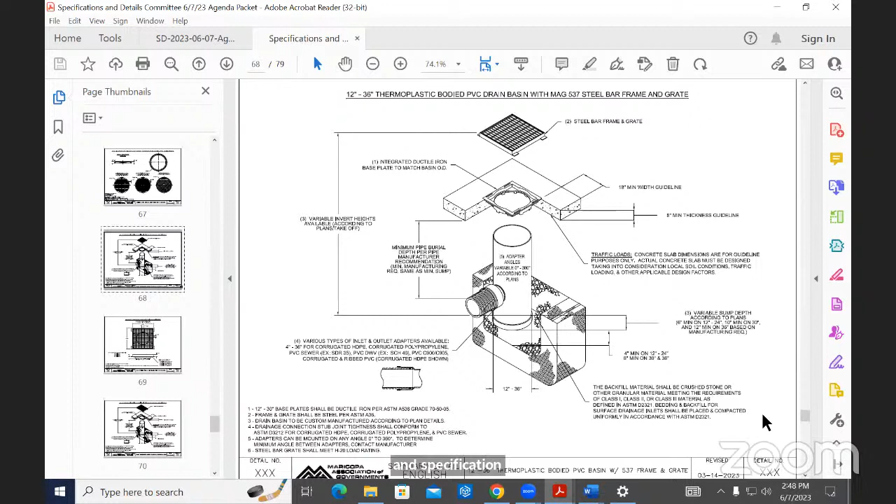Yeah, we've designed these as non-proprietary. Obviously, Tony and I with ADS, we're kind of leading the charge here, but there are numerous other manufacturers out there, just to name a few, Harco, NDS, that do similar style basins. So it wouldn't just have to come from one manufacturer. Like I said, we're just leading the charge here.

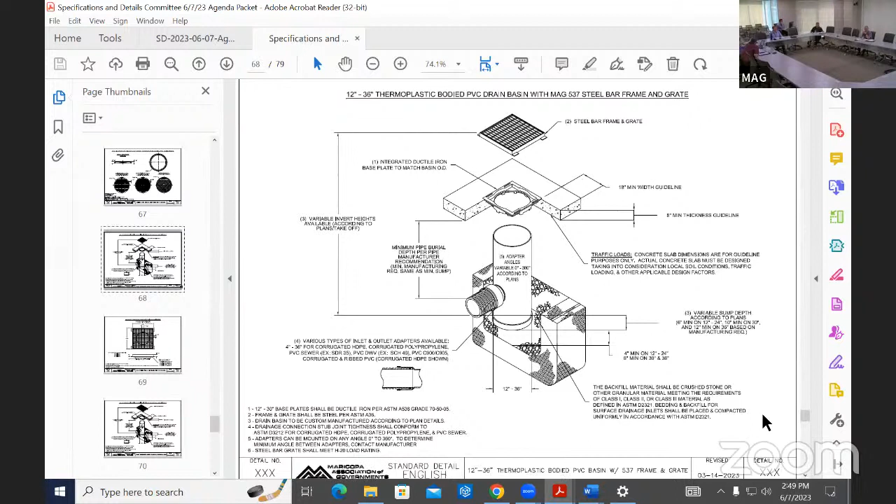So are there aspects of the details or specifications that need to be modified in order to allow these other manufacturers? Or are there very specific elements in these details right now that limit those other manufacturers from use?

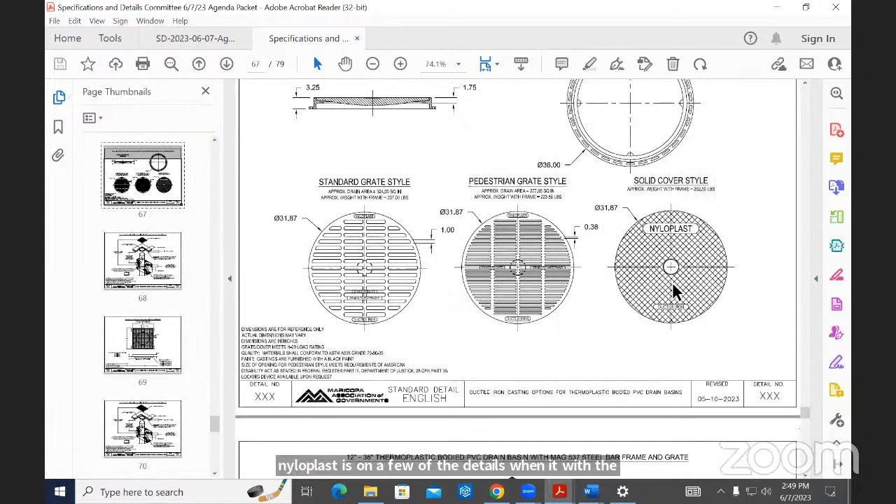To our knowledge, these are as general as we can make them. It looks like, just from a drafting standpoint, the word Nyloplast is on a few of the details if you scroll up to the individual ductile iron castings. That's the only place where I see something that would be considered proprietary, but we can work on that as we redraft these. But yeah, everything else should be pretty standard across the board for what we understand other companies who do something similar would be putting out as well.

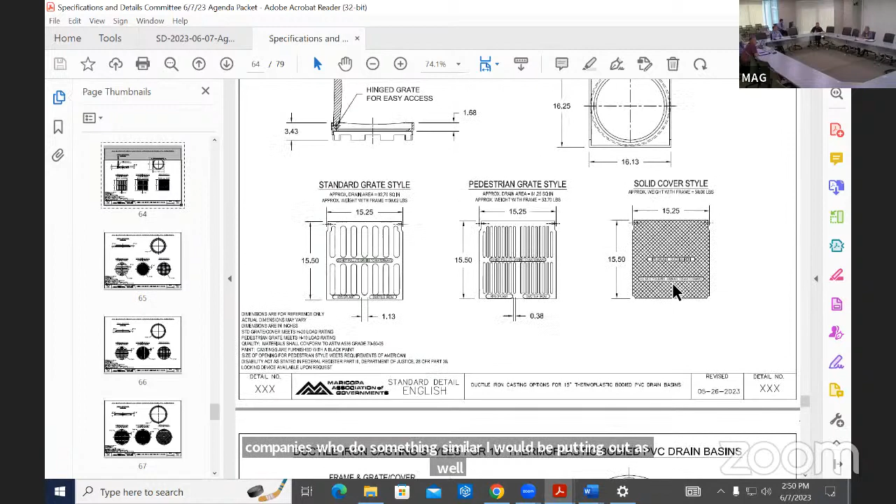Okay, that's great. I would request from the outside right-of-way working group to get feedback from some other manufacturers, and I'd love to hear the comments and feedback from other manufacturers as well, if they're supportive of the details, or if they have recommendations or suggestions on the details and specifications. If those in the outside right-of-way group working on this could help provide that information, I think that would be helpful.

Other feedback, questions, comments from the committee? Nobody else? Just me today.

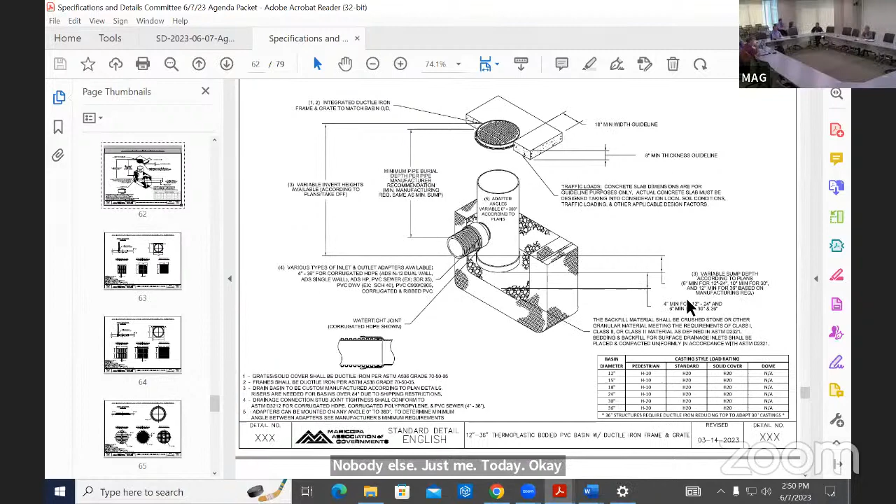Okay, well, thank you for the work on this case so far. Look forward to continuing to see it progress. Again, I'd encourage the committee to go back and review these specifications and details that have been prepared, talk to others within your municipality that may want to provide feedback, and we'll continue to have some more discussion in future meetings.

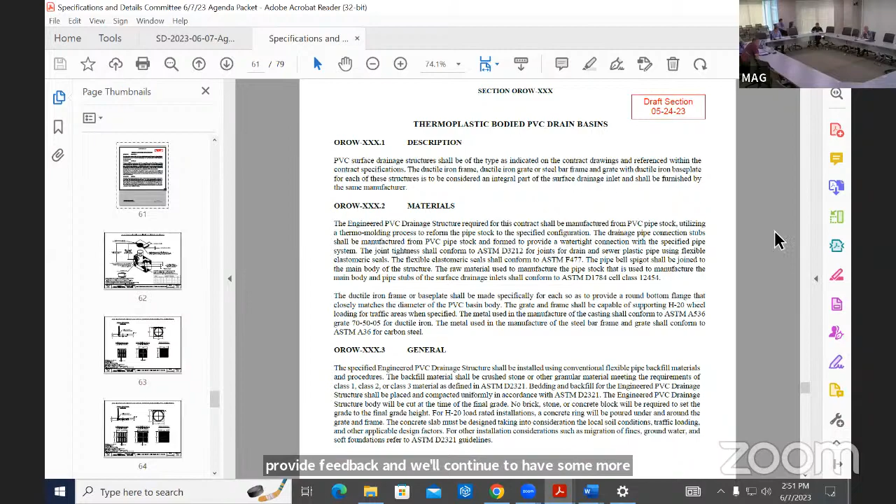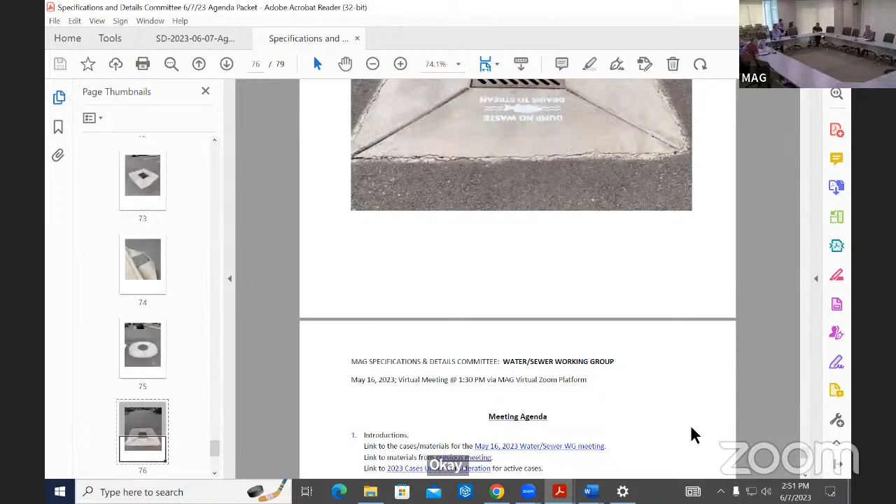We'll go ahead and move on to our next agenda item. Agenda item 15 is new or potential cases for 2023. This is an opportunity for members of the committee to discuss any potential cases that are considered for introduction here in the near future. Gordon,

I think we were going to talk a little bit about the outside of right-of-way document, but I think Peter was kind of leading that up, and he's not present today for this meeting.

I'm here now. I'm here now. Oh, he's here. Yeah, I got my other committee over with, and for some reason did not get connectivity, so I climbed up to the top of the hotel I'm at, and I'm there now. All right. Well, we appreciate it.

So we're on this new or potential cases, and I know there was some email correspondence back and forth. Do you want to talk about a potential case for the outside of right-of-way document as an idea, or a document as a whole, I guess?

Yeah, and I think the case that was just brought up was a great example of how do we put numbers, how are we going to organize these as they come together. So Gordon and I, and of course yourself, we had some correspondence going back and forth, and I don't know if you've got any of that available, Gordon. We talked about trying to put this together as a case to be presented at the next meeting that would potentially show the general format.

We've got to decide what we're going to call these things, how we're going to number them, how we're going to number the standards versus the specifications versus the details, the sections, how they're going to come together in the most general sense, and of course the foreword that goes with that.

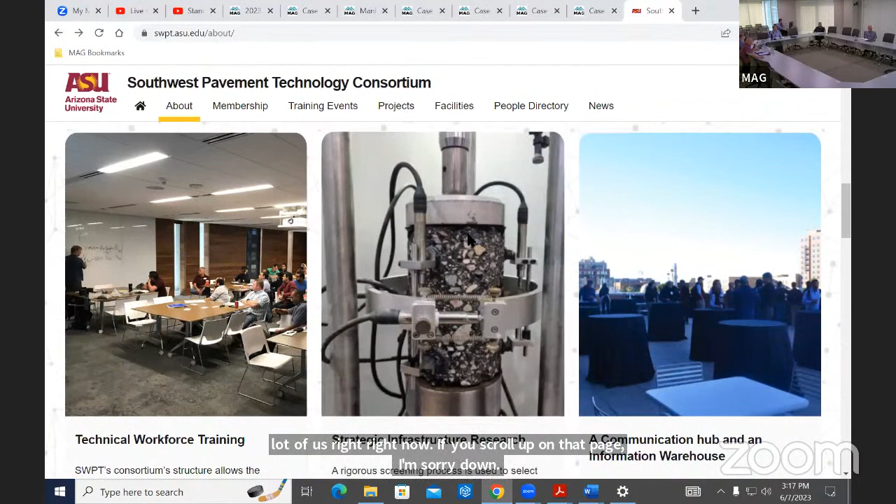If you go back to the previous page, Gordon, yes, right now there's a lot of people on the advisory board that are going to be coming into the consortium. A lot of us right now, if you scroll down on that page, I think it's towards the bottom. There's a lot of people kind of involved a little bit right now, but agencies, in order to keep this thing going, ultimately it's to bring everybody in, hopefully be somewhat inclusive on the findings, and start putting this into the real world and get some empirical data along with it.

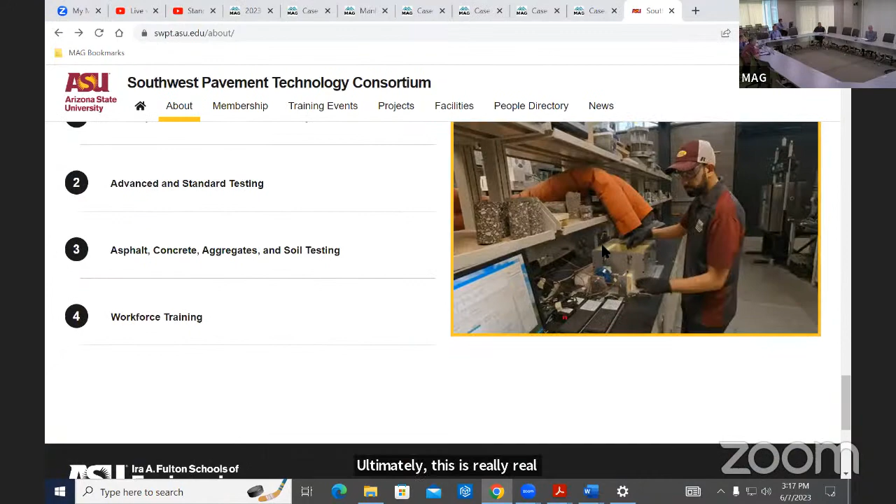My understanding is the presentation would be, you just gave us a 2-minute version of what the consortium is, but the presentation would be talking more about what the group is and what they're working to accomplish, and how it may impact our committee. It may very well, absolutely.

Yeah, I think that would be a good presentation myself. Other members of the committee? I'm seeing some head shaking, yes. Would that be okay for July, maybe a 15-minute presentation at the July meeting? I'm okay with that.